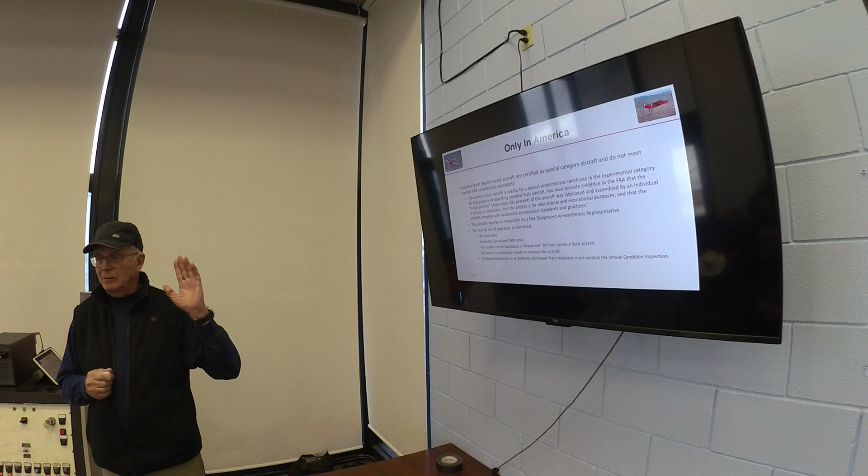I'm going to talk a little bit about amateur-built aircraft in general, and this is titled Only in America. What a fantastic country. This is one of the few places I know that you can design your own airplane, build it, test fly it yourself, see if it's going to kill you, and you don't have to have any instruction or a pilot's license to do that. That's the Part 103 ultralight class of aircraft. Isn't that incredible? The FAA will let you go out and kill yourself, and as long as it's just you, they don't care. It's a single-place airplane.

One step up from that is amateur-built aircraft, where you can do the same thing, but to fly it you do need a pilot's license, either a light sport aircraft license or a private pilot's license. But what's really cool is that once the FAA gives you an airworthiness certificate, which involves them coming out and inspecting the aircraft, and once you fly a test program for 40 hours in a particular area that you define with the FAA as a safe area to fly, then you can enter what they call Phase 2.

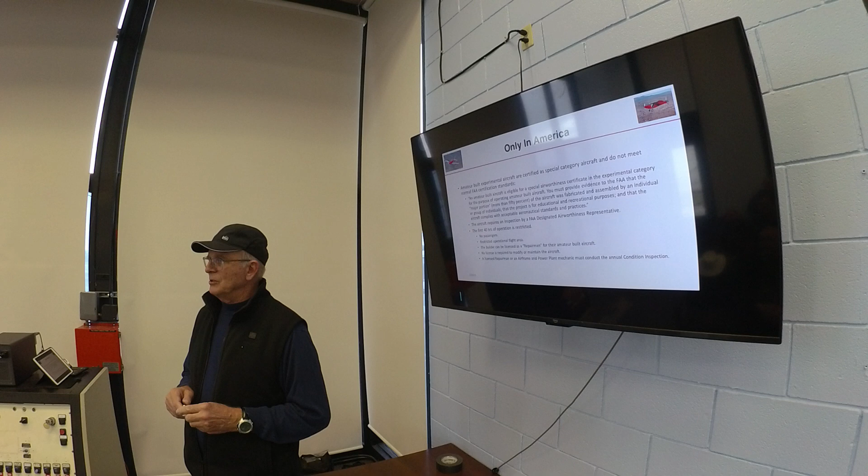And Phase 2 lets you take that airplane that you designed, built, constructed, and fly it anywhere that any GA aircraft can fly in the national airspace system. So you can fly it over cities, you could fly IFR, you could fly into big airports, small airports, just about any place, which is really great.

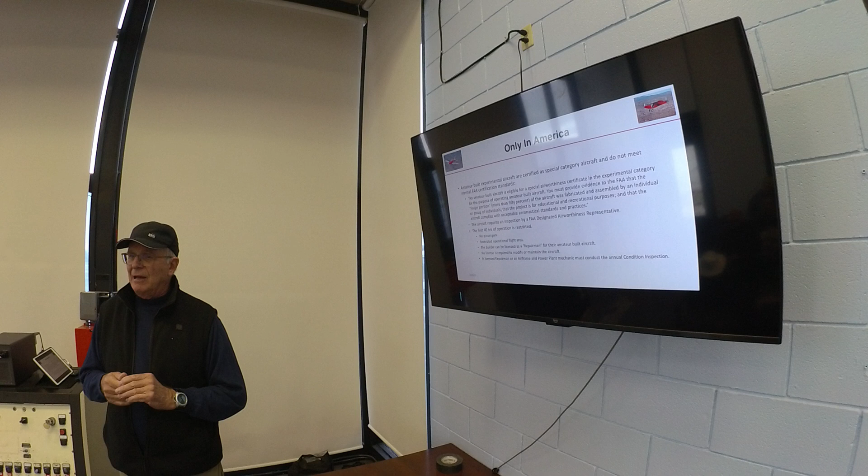And the other thing they'll do for you is they will issue a special repairman license for that aircraft that allows you to not only work on it, modify it, but also to do the required annual inspection of the aircraft. So you don't have to hire an airframe and powerplant mechanic to do that. So you can save a lot of money. And you can build the aircraft oftentimes for half or even a third of what it would cost you to buy a new airplane with similar performance. So, only in America. Really great.

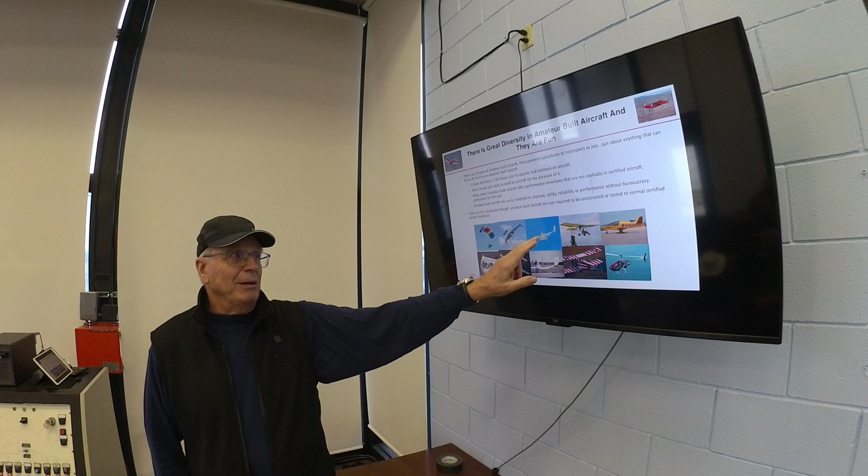Okay, there's a huge amount of diversity in experimental aircraft. Here's just some examples: powered parachute, ultralight, a rocket-powered aircraft, jet-powered helicopters, biplanes, turboprops, crazy wild designs. I mean, this country is prolific with different types of aircraft designs that fall into this category.

Okay, so what I'm going to do is compare the Venture and some other amateur-built high-performance aircraft to sort of the peak of piston aircraft design. And so aircraft design pretty much peaked towards the end of World War II with fighter aircraft. They had the newest aeronautical information for design, aerodynamics for design. They had big, powerful engines. They were single-place aircraft, so they flew fast.

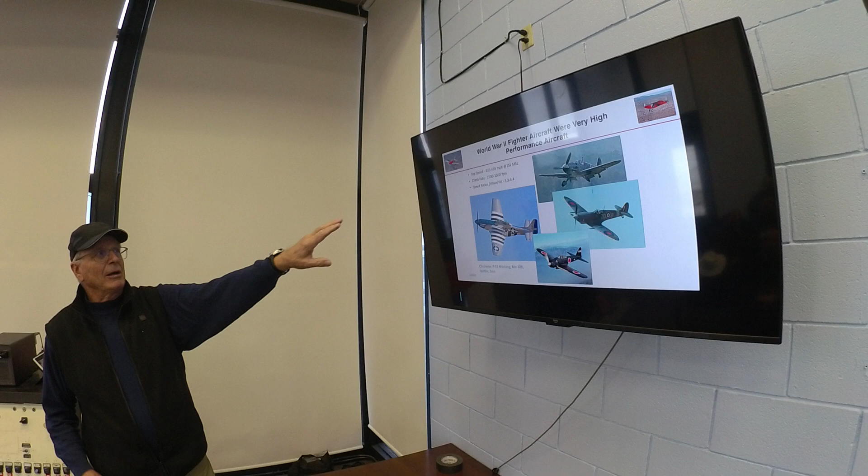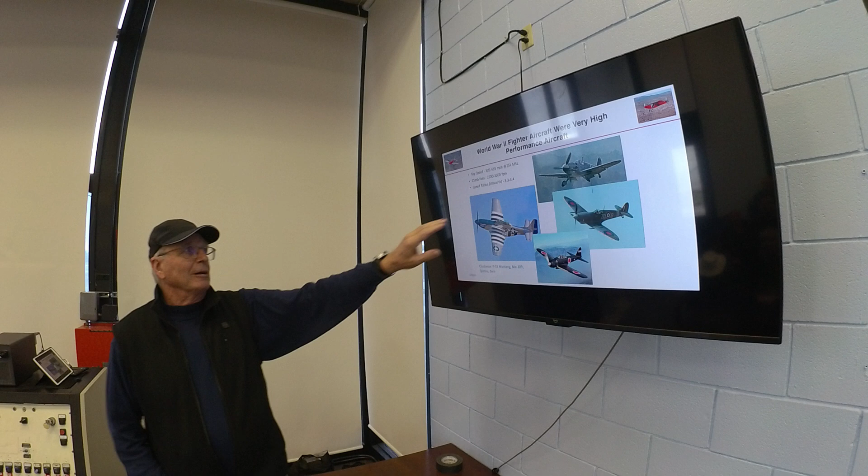And so here's a few examples of them. The P-51 Mustang, the ME-109, the Spitfire, and the Zero. Looking at these aircraft, they had a top speed range of 335 to 435 miles an hour at 25,000 feet. Climb rates of 2,700 to 3,300 feet per minute. And their speed ratio, remember we were talking about that, ranged from 3.3 to 4.4. So let's compare these to some of the modern amateur-built aircraft that have been built.

So this is a Venture. This is called a Thunder Mustang. It's a 3/4 scale of the P-51 Mustang. This is a turboprop called a Legend. Lancair IV-P, that's a pressurized four-place aircraft. Cruises about 220 knots at 25,000 feet. Here's another four-place. It's a pusher with a canard-type aircraft called a Velocity. It's also a four-place aircraft, and it'll cruise very nicely at about 200 knots at 10,000 feet.

This is a Viper. It's pure jet, and here's one of the RV series, the RV-8, which is one of their more efficient aircraft. These aircraft have top speeds from 200 to 450 miles an hour, climb rates from 1,500 feet per minute to 6,000 feet per minute, speed ratios of 3.2 to 4.2. So you can see their speed ratios are right in there with those World War II aircraft. And I got to tell you, that's what it feels like when you're flying them. They are thrilling to fly, these amateur builds.

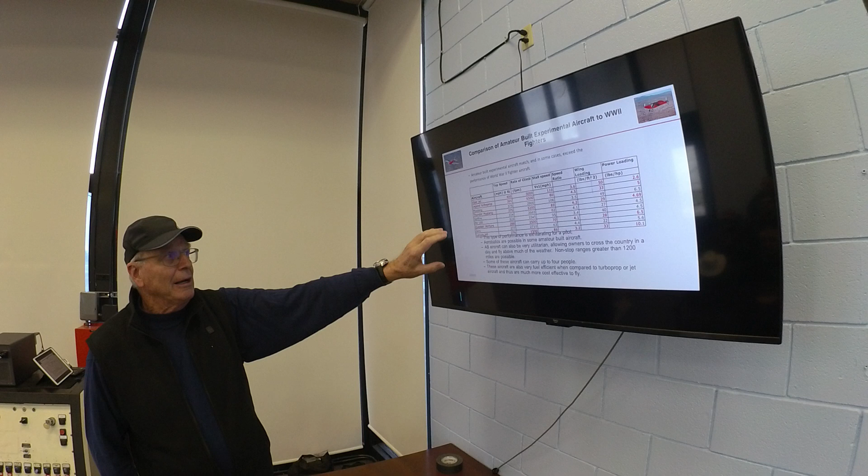So this just kind of interlaces those two. So this is top to bottom based on top speed. And the ones in red are the amateur-built aircraft. The ones in black are the military fighters. And so you can see they pretty much all line up right up there along with the fighters.

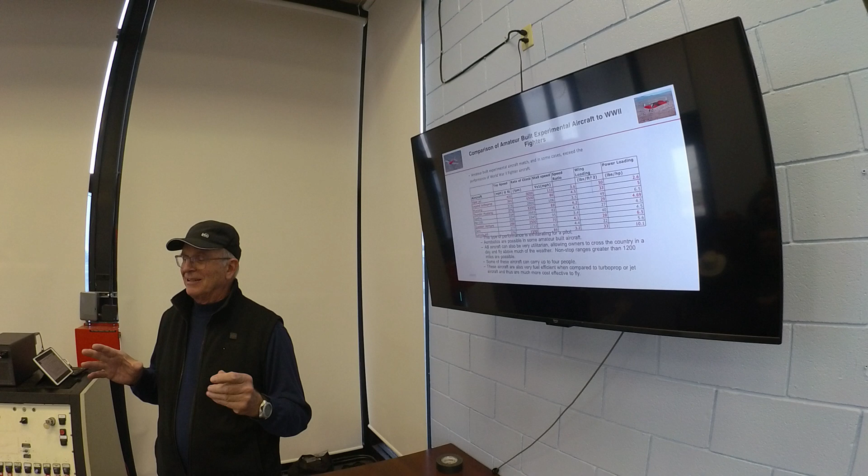Will, when you're talking top speed, is that top of green, top of yellow, VNE, when you do the speed ratio? So that's their VNE? Maximum cruise, no, not VNE, maximum sustained cruise speed. Okay, so top of the green arc, okay. It's as fast as they'll go, basically, at either rated altitude, 25,000 feet, or in the case of most of the amateur builds, it's between 8 and 10,000 feet.

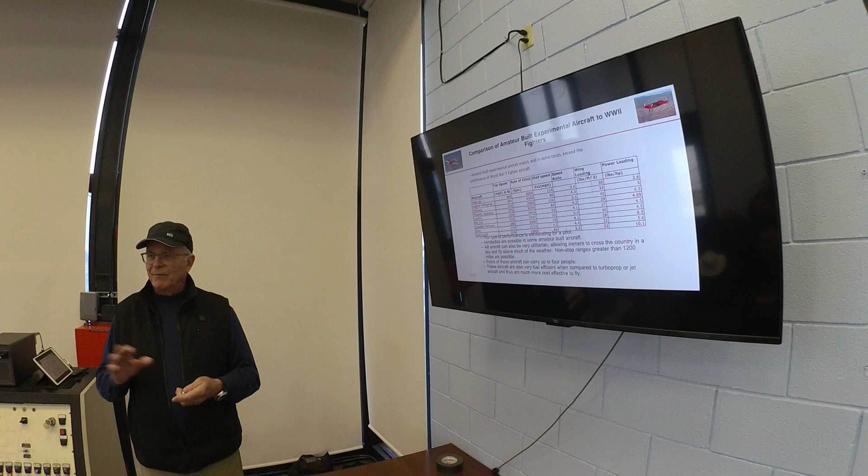So it's not VNEs. VNE on these was considerably higher than that. So on a dive, you could go much faster than that. And that's true of the experimentals too. For example, on the Venture, the maximum sea level speed is 250 knots, but my VNE is 300 knots. And that's indicated airspeed.

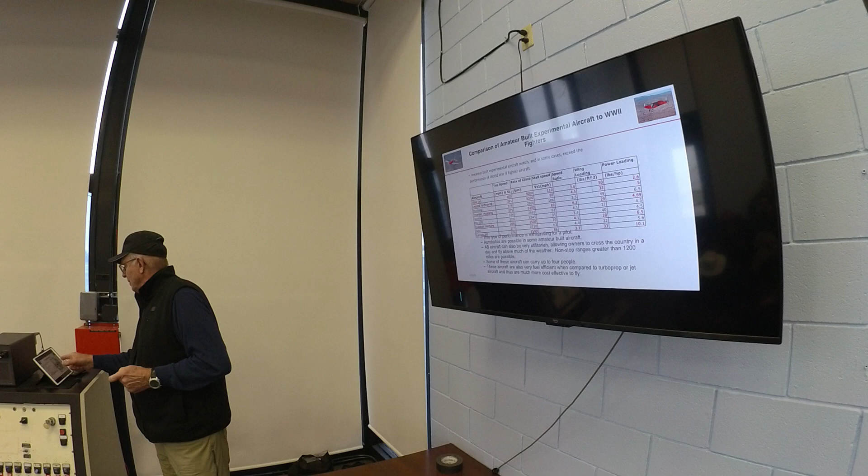So let me talk a little bit about the Venture design. So the concept for this aircraft was to build a high-speed, high-altitude, efficient cross-country aircraft. And the Venture really excels for high-performance aircraft in terms of efficiency, and I'll talk more about that. And basically, they wanted to build an aircraft that could fly halfway across the country in 4 hours. And the way they did this was, first, low drag. How do we make this a low drag aircraft?

The wing has an aspect ratio, that is the span of the wing to the chord of the wing, of about 10.4 to 1. If you consider more general aviation aircraft, those are more like 6 to 8 kind of aspect ratios.

And that makes for high flyers. The higher the aspect ratio, the more efficiency the aircraft maintains as it goes up in altitude. The other one was to minimize the fuselage drag, and that's one of the reasons the Venture has such a short fuselage. It turns out if you look at aerodynamic shapes for fuselages, the optimum ratio of length to diameter for a fuselage is 4 to 1, kind of like that flat plate number.

And so the Venture, that's what it is. The fuselage is a little over 48 inches in diameter, and it's about 16.5 feet long. So it's right in there. So that's a design for minimum parasitic drag. The Venture has got compound curves in it, so that everything in that airplane is curved. It's made out of aluminum, but everything has got an aerodynamic curve to it.

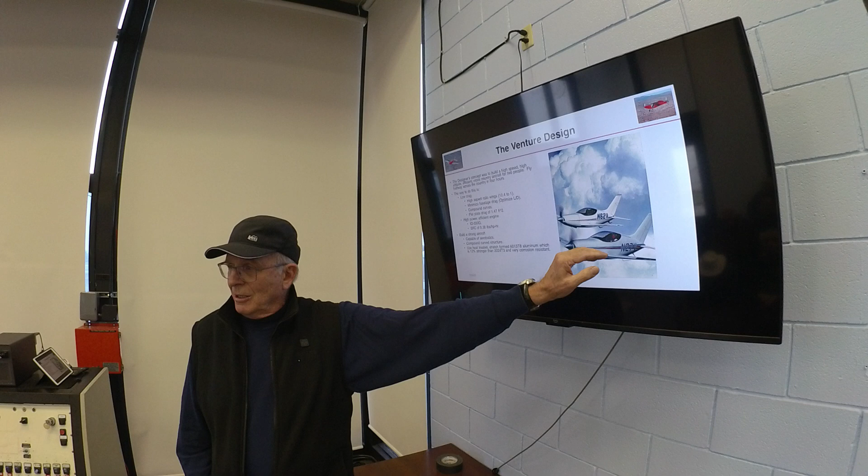And so if you look at the wing, not only does it curve from leading edge to trailing edge in an airfoil shape, it also curves span-wise from inboard to outboard. So everything's a compound curve. The fuselage is all compound curves, tail feathers, everything. And the way they did that was there was a new aluminum that came out called 6013. It could be annealed and stretch formed.

So the way they would form these compound curves is they would machine out a very accurate mold for wings, for the fuselage, and then they'd grab this aluminum in the annealed condition with these huge hydraulic grabbers, and they would just push it down over the mold. Just like you'd take saran wrap, right? Put it over last night's dinner or something like that. And then you'd cut the shape out afterwards.

And then they would go back and heat treat it, and this aluminum would heat treat to a 12% higher yield strength than 2024 T3, which is the commonly accepted aluminum. And in addition to that, it was very corrosion resistant. And it turns out that this fuselage is a monocoque type design, so most of the stresses are carried in the skin.

When you curve it like this, it's sort of like an egg, right? You know how tough eggs are because they've got all those curves? And the same thing with this fuselage. And I'll show you that makes it very crash resistant. Not crash resistant, but survivable in a crash. Now really, it is crash resistant, I'll tell you about that. But also, you want survivability.

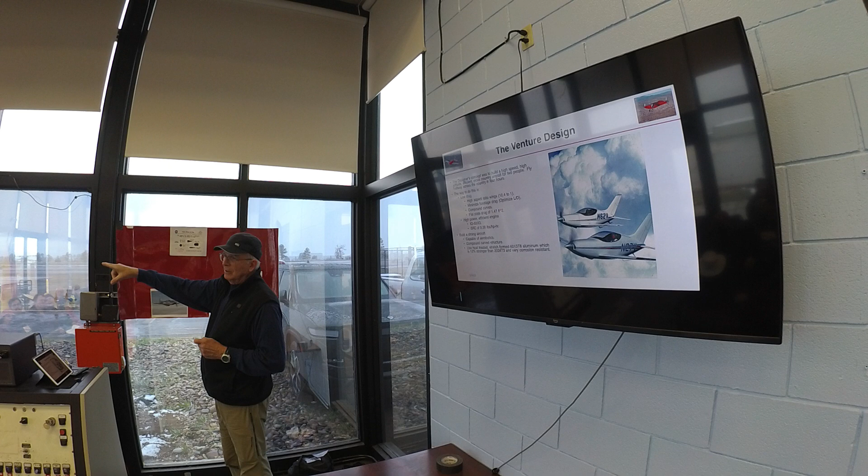So a P-51 at gross is 9,000 pounds, a 182 at gross is, where's Keith? What is it? 2950. So three times the gross weight. The reason they got this with the P-51 was they went to laminar flow airfoils and wings, and they paid a lot of attention to making it just as sleek as they could.

So I wish I was going to bring it out today, but the weather is crummy. But if you stand at the Venture and you look at the front, you've got this fuselage, that's like this rounded square that's like 4 feet by 4 feet, 16 square feet. And then you got the wings, you got the tail surfaces. The air thinks it looks like that. Pretty phenomenal. Coefficient of drag is less than 0.02 for the aircraft.

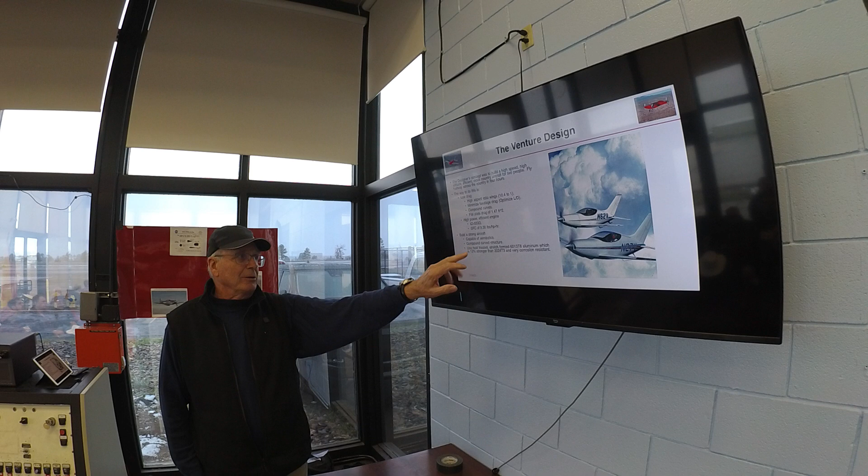They wanted the aircraft to be strong, capable of aerobatics, compound curve structure, and I talked about that. Okay, here's some stats on it. So the Venture, the air loves the Venture, and the Venture loves the air. It's a beautiful thing in the air to fly, and its performance is phenomenal. 250 knots, which is about 280 miles an hour, on 280 horse.

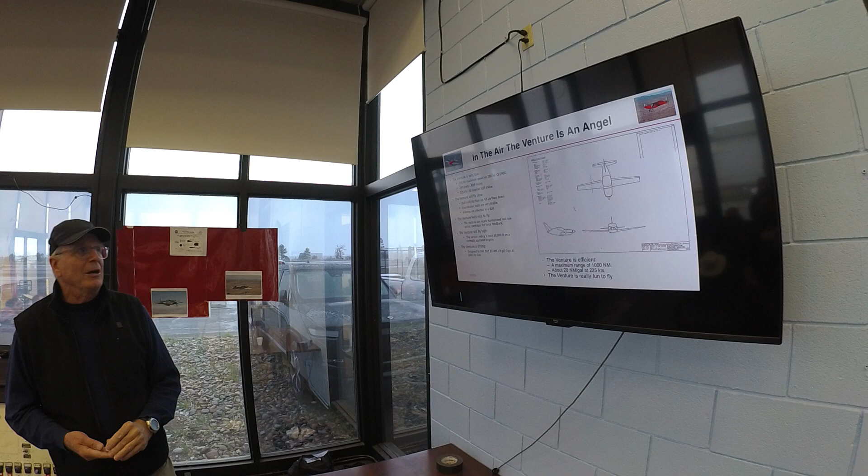240 knots, that's maximum speed. This is the rich of peak. This is when you have a richer mixture in the aircraft, so this would be around 0.38 to 0.4 pounds per horsepower hour. About 16 gallons an hour. This is where I normally cruise, 225 knots, about 250 miles an hour, 50 degrees lean of peak, and so I'm actually running a little bit less than 0.38 pounds per, so burning about 11.5 gallons an hour.

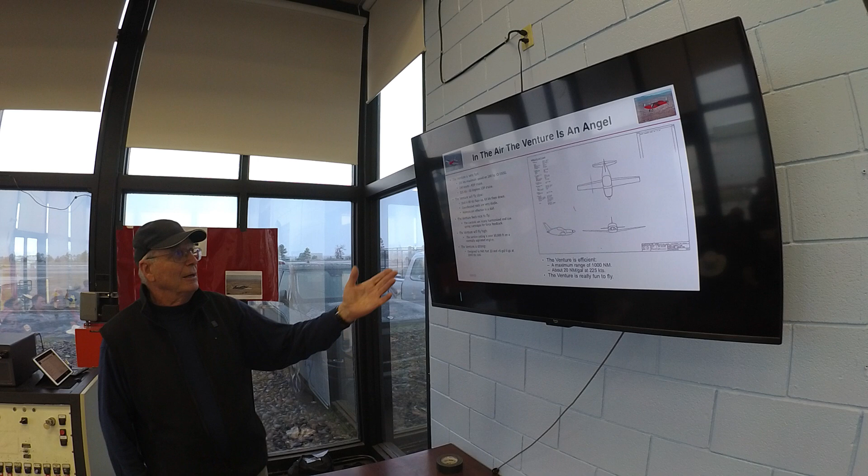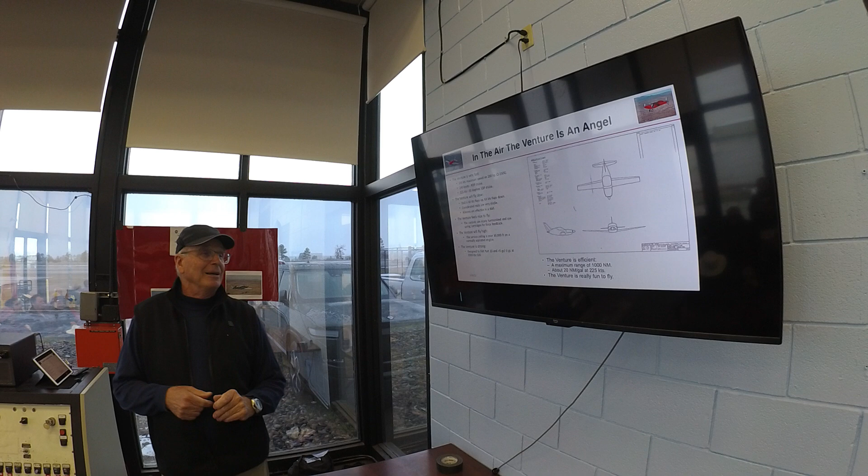It also flies slow, it has a big speed ratio. Stall speed 68 knots flaps up, 63 knots flaps down. Mine is 63 knots flaps down. The published is 61. It has phenomenal stall characteristics for a high-performance aircraft. Essentially not much of a break at all, and it's fully controlled. The flaperons allow it to be fully controlled in a stall, so you can roll the airplane plus or minus 30 degrees in the stall. Good feedback on the controls. They're all harmonized, so they feel right to you, and I'll explain that later a little more.

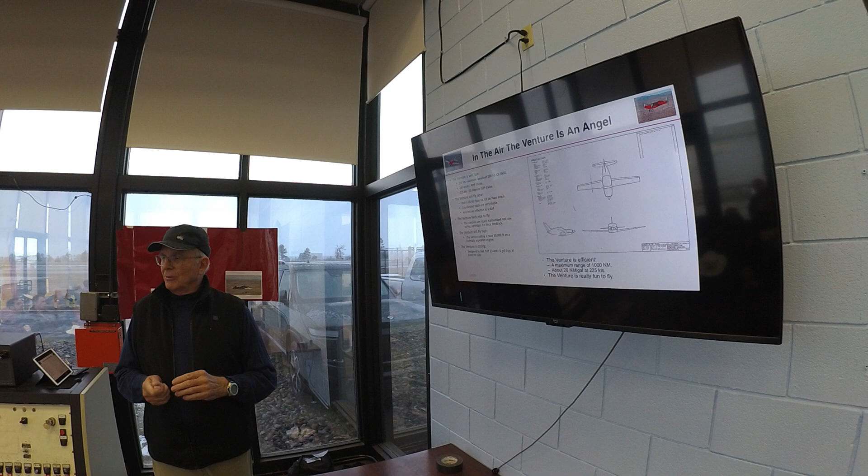Service ceiling on a normally aspirated Venture is 30,000 feet. So it set one of the early time to climb records and also an altitude record, and it was a little over 33,000 feet. And it's designed for Part 23. For those of you who don't know, that's standard certification requirements for general aviation aircraft. Plus 5 Gs, minus 3 Gs with a 2,000-pound gross.

Now, if you don't believe me, I could show you a bunch of these. But this is one from Steve Cook. He flies a lot of Haitian relief effort flights, and he lives up in Kentucky, and he goes down to Florida to pick up an airplane to fly on those flights. So he's flying his Venture down there. He's flying at 18,000 feet, so he's on oxygen. Venture isn't pressurized. His indicated airspeed is 175 knots.

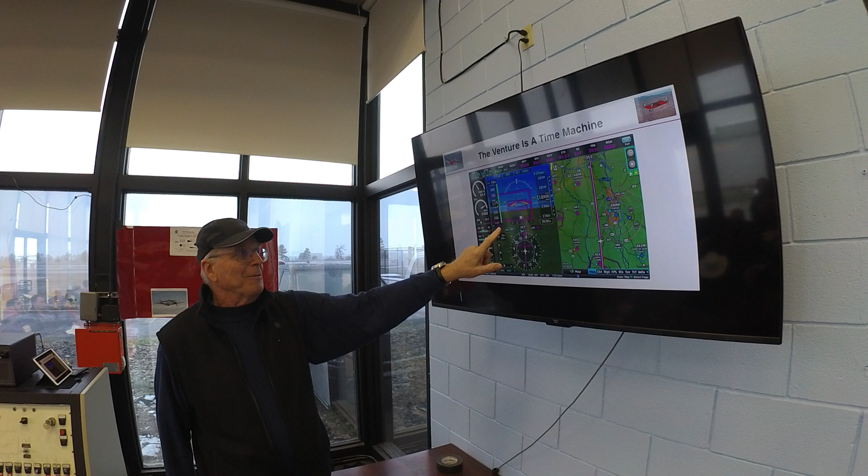His true airspeed, that's how fast he's really going through the air, is 236 knots, which is pretty close to that 240, but he's at 18,000 feet instead of 10,000. He's burning 10.4 gallons an hour. And according to the Garmin, his ground speed is only 237 knots. So basically there's only 1 knot of wind pushing him along up there. So these guys love to send these kind of pictures out to everybody and say, hey man, look at me.

Yes, sir. So you said it was pretty smooth and no break on stall? Yes. And what are the flying characteristics like if you're in slow flight? So they're actually pretty good. So the nose is up a little more, right? Normally in cruise it's way down, it seems like. It's up a little bit more.

But like over the numbers, I'm doing about 90 knots. And, you know, it's still got lots of roll. It's got full span flaperons. So the flaps are full span and they're coupled with the aileron. So it has really good roll authority. Does that make it difficult to find the stall?

Well, not particularly, because mine doesn't have a stall horn, but it has an aerodynamic rumble, and it was designed into it, so that as you slow down, as you start to approach the stall, flow starts separating from the wing. Not all of it, just begins to, and that's designed to hit the tail surfaces and cause the airplane to do this. So as you'll be flying along like this, it'll start slowing down, and then it'll start doing this.

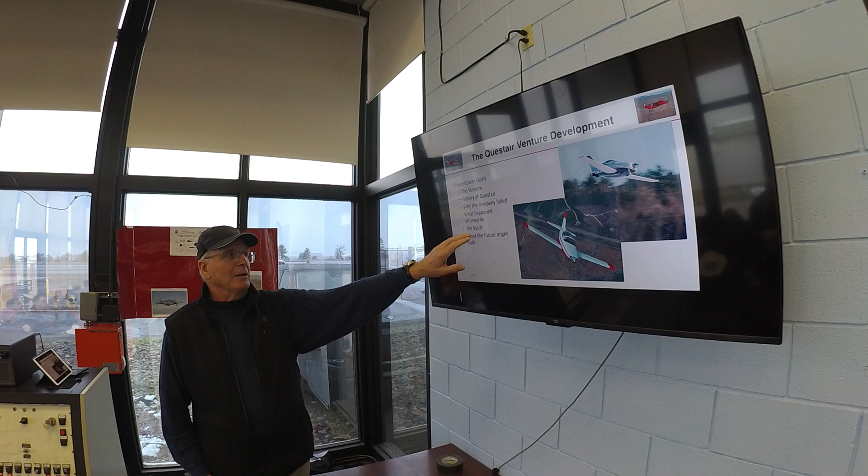Okay, I want to tell you a little bit about the history of the company, why the company failed, what happens afterwards, a fixed gear version of the Venture called the Spirit with a smaller engine, and what the future might hold. In the beginning, Jim Griswold and Ed Macdonough were amazing engineers. I didn't have a chance to meet Jim, but I had a chance to meet Ed Macdonough. A short story about Ed.

When he first got out of school, he was an aeronautical engineer. He went to work for Vought, I believe it was, and he went for an interview. They were walking around Vought, and they said, "Oh, we got something cool going on in the backyard here. Let's go take a look." So they go out there, and here was this machine. It had no wings, a giant propeller on the top of it, and a little propeller off to the side. And this crazy Russian was trying to fly it, named Sikorsky. So he got to see Sikorsky test flying the first helicopter, and that was sort of the beginning of his career.

At the end of his career, he was personal friends with the chairman of Honda Aircraft and was consulting at 90 for them on the design of the Honda aircraft. Just a real Renaissance guy. Jim was a very capable engineer. So both these guys worked at Piper Aircraft. Jim was head of engineering, and Ed was the chief design engineer for Piper. And these two guys came out with the Malibu.

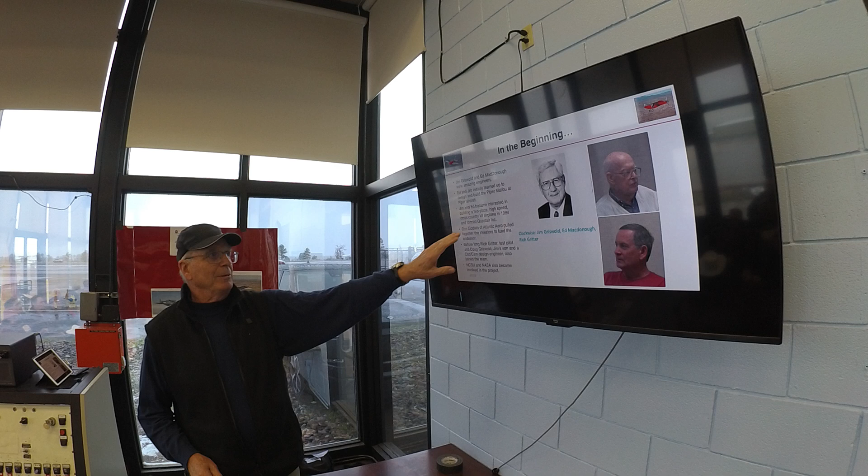While they were doing that, two other people joined them. This is Rich Gritter. Rich was the test pilot for the Questair Venture, and also he's an engineer and also contributed to design and construction. Rich actually was the chief test pilot for the Honda Jet as well.

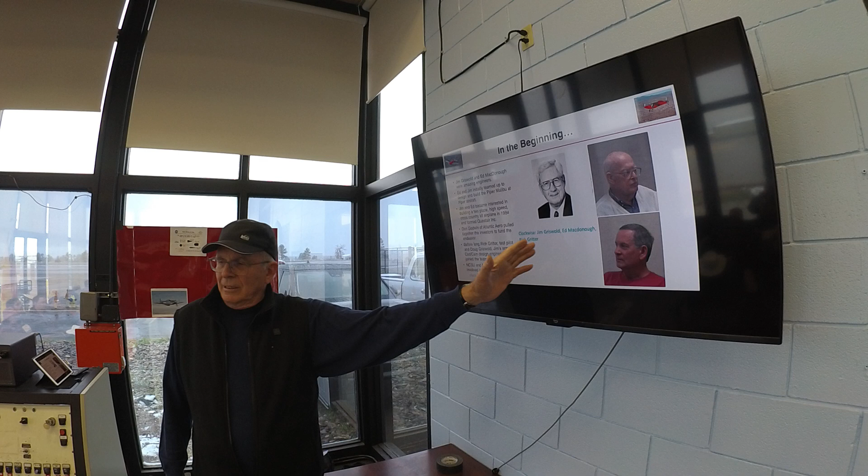And then Jim's son had just graduated from college. He was an aeronautical engineer. And he had a skill nobody else had, and that was, he knew how to do CAD/CAM. And nobody was building airplanes based on computer-aided design at that time. And so this was one of the first amateur-built aircraft kits that was designed completely on CAD/CAM and completely machined

using CAD/CAM. They hooked up with a guy by the name of Don Goldwyn, who owned a company called Atlantic Aero, and he pulled some investors together, and off they went. And in the process, they also hooked up with North Carolina State University and NASA to work on the project.

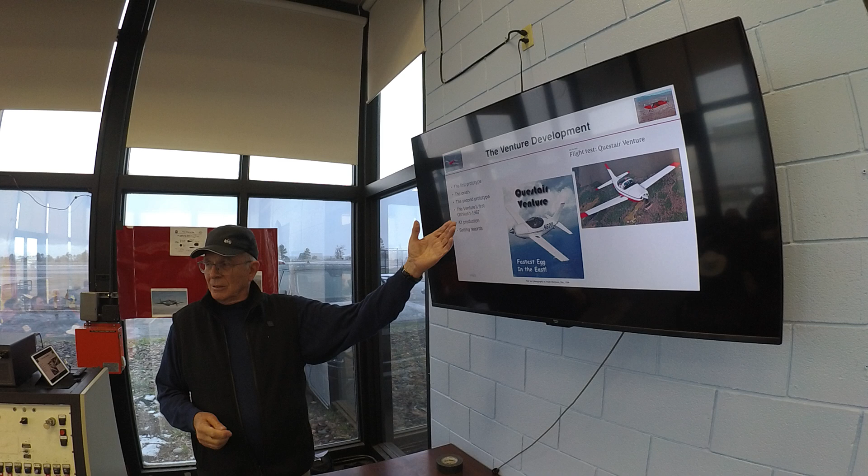So then they went into kit production, and they had about, I'll look at my next slide here. Oh, okay. Let me talk about setting records. So everybody wanted to grab one of these new airplanes and get it flying. There's some real enthusiasts associated with them.

And right off the bat, with the second prototype, they set the world time-to-climb records to 3,000 meters, 6,000 meters, 9,000 meters. They set the closed course records for 3 kilometer, 100 kilometer, 1,000 kilometer. This was in their class. And then they started racing at Reno and other races. And the Venture was winning all these races.

At Reno, there were two guys that did most of this, Tony Crawford and Mike Dacey. Tony's airplane, he retired just recently, a couple of years ago. It's in the Oshkosh Museum. He has a bunch of records and places in Reno and other races, and they're all listed on the side of his airplane. It was Chicks Delight. It was all on the side of the aircraft.

And Mike Dacey pretty much focused on Reno, and he wanted to win the Super Sport class, which is the class just below the Unlimited class, piston aircraft class. And he placed several times, and finally in 2010 he won the race. And his average speed was 374 miles an hour. I talked to him afterwards, he told me, you know, in the straights, Will, I was hitting 420 miles an hour.

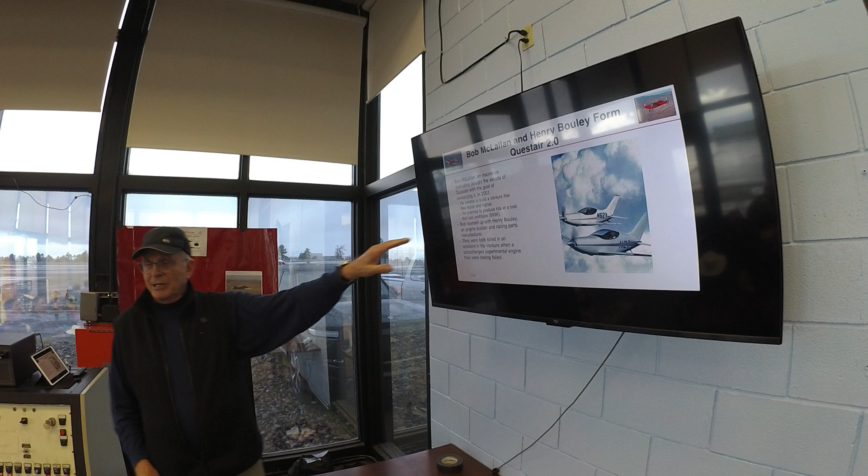But along came Bob McLellan and Henry Bouley, and Bob McLellan was a real estate executive. He was the money guy. And Henry was an engine builder and also built parts for certified aircraft. And they said, "Oh, we're going to be really successful. First of all, we're going to charge $90K for the kit, and we're going to make it fly higher and

go faster." And they said, what we're going to do is we're going to put a 350 horsepower twin turbocharged engine so this airplane can go to 25,000 feet and do 300 knots. Now 300 knots is kind of getting in the jet range, right? So this was going to be a real rocket ship. It was already a rocket ship, but this was going to be something else.

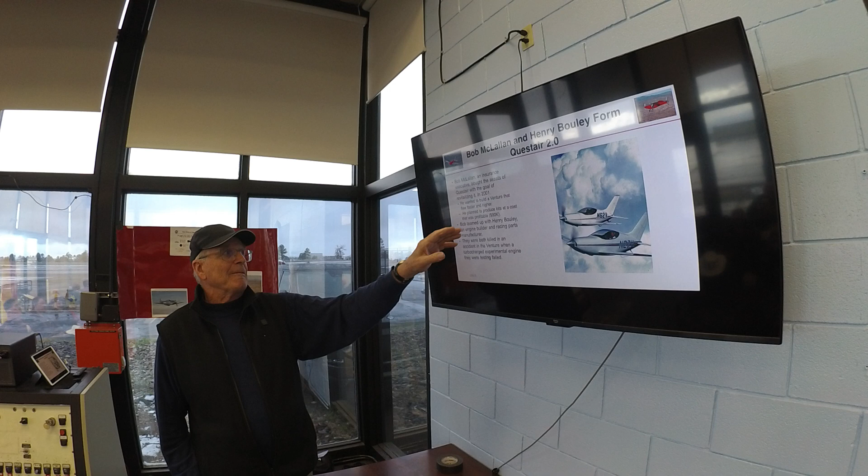And so Henry was an engine builder, and he decided that, okay, I want to build the best engine I can, except he couldn't get a forged crank. So he machined a crankshaft out of a billet of steel. Now this is going to tell you why you don't want to fly airplanes with cranks that aren't forged, okay? So he's flying this airplane, they're doing some tests, he and Bob are up there at 16,000 feet scooting along. I think they were probably doing 280 knots, 275 knots, and the crank let go because it wasn't forged.

They did a lot of metallurgical analysis afterwards to see what happened. And it broke in two places. So they had an engine failure. They were over an airport. You need to hear the radio calls, but they were over an airport. The engine was running rough, and then they thought it was coming back, and then it got even rougher, and then I'm coming down, and so they're spiraling down over this airport.

We lost the alternator. It shook the alternator off the brackets. We lost the alternator. The battery's going down. We're going to put the gear down. They put the gear down. Their descent rate went from about 800 feet a minute to about 2,000 feet per minute. The gear is a lot of drag, and it's designed to be that way to slow this thing down, because you got to slow these airplanes down.

And they came up short, and they stalled the airplane and spun it at about 1,000 feet AGL and killed them both. So that was the end of Venture 2.0. Went into bankruptcy again, but by this time there were 120 kits out there. People were building Ventures, and a few of the owners and kit builders decided they wanted to go in and buy the assets. One guy was Richard Clausen. He went and purchased a lot of the assets, which were remaining kits and the remaining parts production.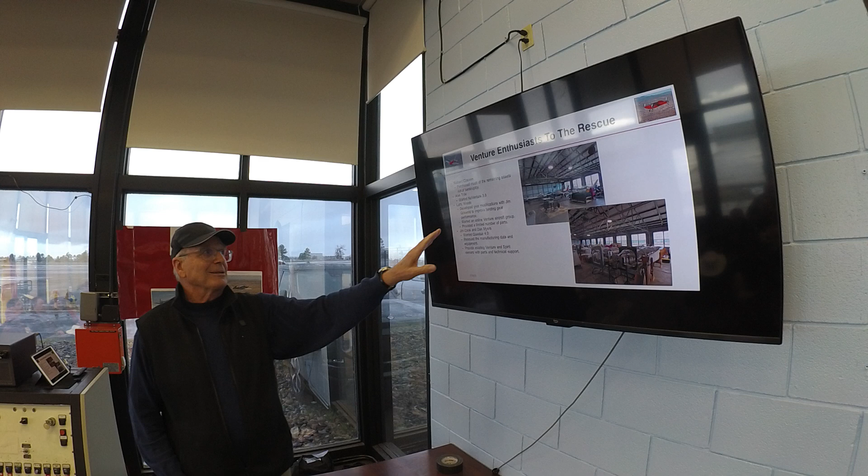He'd show up at Oshkosh with a folding table, and he hadn't even rented a place. He just found some place to set this folding table up, and he'd have a few brochures, you know, like handwritten and copied. And you go up to him and you say, "Hey, my name's Will Fox, can you tell me about the Venture?" And he says, "Well, I'm only going to talk to you if you're serious, and I just don't want to waste my damn time," and blah, blah, blah. He was the most grumpy, disagreeable guy you could imagine. And nobody could talk to this guy without getting pissed off. So he never sold any Ventures, but he had a lot of the remaining kits and parts.

And then came another Venturist, Larry Woods. He was a Canadian, really, really good guy. And he was a friend of Jim Griswold's. And there were some warts on the Venture I'm going to mention quickly. And Larry said, "I want to fix these warts, and we can build some kits to make this airplane even better. And Jim, will you help me?" So they got together and started working on it, and Larry started making these kits to fix things, and providing those, and also providing some spare parts. Well, things were going great, but Larry caught cancer and he died.

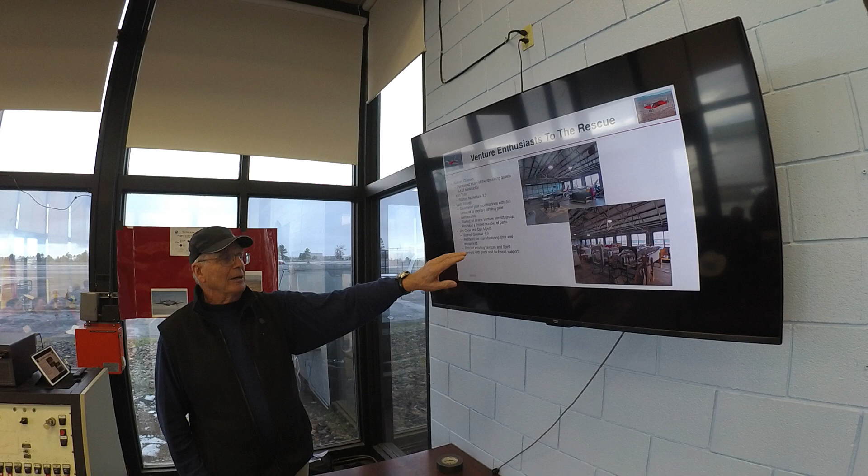And so along came Venture 4.0, Questair 4.0, with Jim Cook and Dan Myers. They were enthusiasts. Jim had built a Venture very early in the game. Had been very successful in an avionics shop he owned in Miami Beach. And they started Questair 4.0, and they rescued all these parts and kits and the manufacturing data for the aircraft, the drawings, the CAD files, everything, and brought it to Mississippi. And they're still functioning right now, and basically they provide Venture and Spirit owners with parts and technical support, but they're not building any kits.

They're really, both of them really good guys.

Okay, the Venture has a few warts. There were landing gear flaws, fuel tank leaks, trim cartridge wear, and stub spar cracks. The biggest problem with the Venture was low speed loss of control. Nobody got hurt in these accidents except one person, and he was killed in the accident. But out of 17 accidents, basically everybody walked away without any trouble.

And what would happen was there was this really quirky landing gear design, and one of the mistakes, and this was a mistake that the engineering team on Venture made, was they had the incorrect gas-oil ratio in the main gear struts. So in a shock absorber, you've got to have a certain amount of gas and a certain amount of oil. The oil gives you the dampening, the gas gives you the spring. Well, they had too much gas and not enough oil.

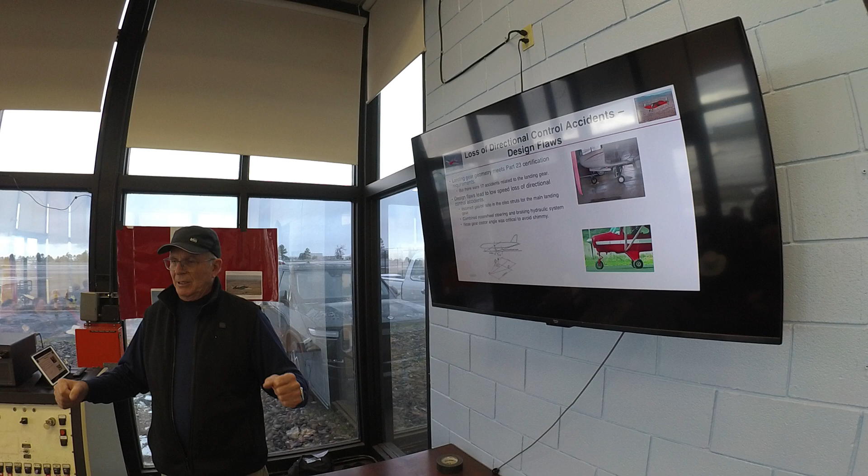So the main gear struts were just all over the place. They were really springy, with hardly any dampening. And that would get you in an accident. If you were landing in a crosswind and the wind shoved you to the side, that shock would compress, right? And you'd start to go that way. The pilot would make a correction, and about the same time, the strut would pop back up. And so then there'd be a bigger swerve. So it induced these pilot oscillations.

They were worst when you got below 30 knots because your rudder was less effective and you were using nose wheel steering. And they had a screwy nose wheel steering too. Normally when you steer a nose wheel on an aircraft, from the rudder pedal there's a mechanical linkage that goes up to a bell crank that steers the nose wheel, right? Well, that was too heavy, too expensive. So what they did is said, we'll take the hydraulics coming off the brake and feed them to a hydraulic actuator that does that.

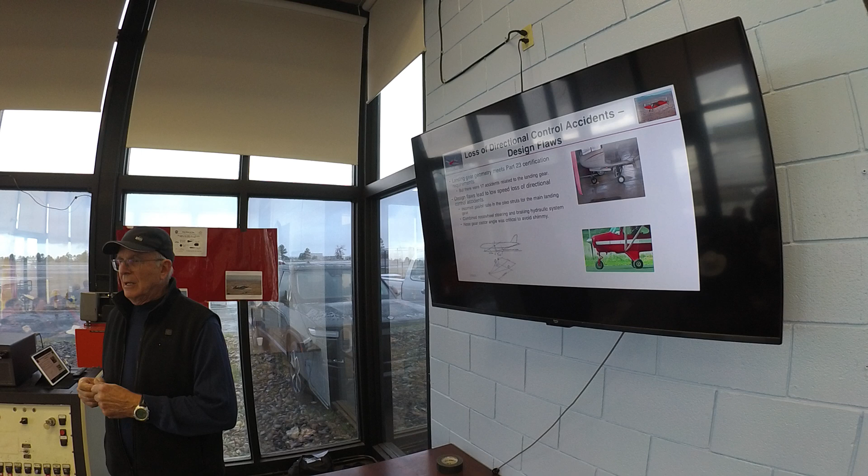So the idea now is, when you push on a brake, say the right brake, you're pressurizing the caliper of the right brake, but you're also shoving the actuator to turn the nose to the right. And so the more pressure you put on the brake, the more you turn the actuator. And God forbid that you actually hit both brakes at the same time, because then you couldn't change wherever the actuator was. You couldn't steer it, because you couldn't do differential pressure.

So then these guys would be in their second PIO going off the runway. Oh, heck, and they'd hit both brakes. They couldn't steer. They couldn't change its direction. And they'd go off the runway, hit a pothole or a ditch, break the nose gear off, sometimes flip over.

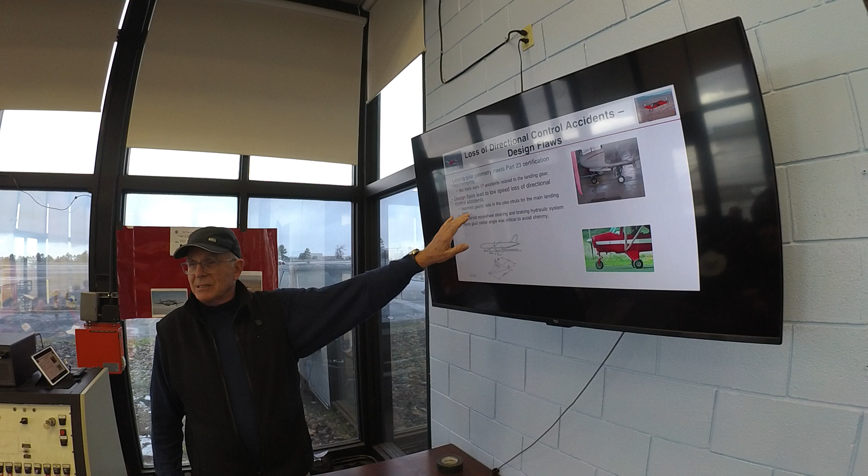That happened to Larry Woods. He said, yeah, I was upside down in the mud, and I was kind of sinking down in the mud, and I was watching it go by the canopy. I was wondering if everybody was going to get me out past the canopy, right? So five guys came over and lifted it up so he could get out. But that created a lot of accidents. They weren't fatal, almost no injuries with that one exception.

And here's the really bad thing, and this is something to know about amateur-built aircraft. If you're going to buy an amateur-built aircraft, and you have 30,000 hours as an airline pilot, make sure all the controls work the way that everybody's used to them working. Because I'm going to show you in a minute that most of the accidents occurred to the high-time pilots.

And it's the law of primacy. You react in an emergency to how you reacted for thousands of hours, not to a new screwy steering system where you've got to just sort of tap this and get it back straight and then hit the brakes. And they had a problem with the nose gear caster angle, and it was prone to shimmy and needed a lot of attention as well.

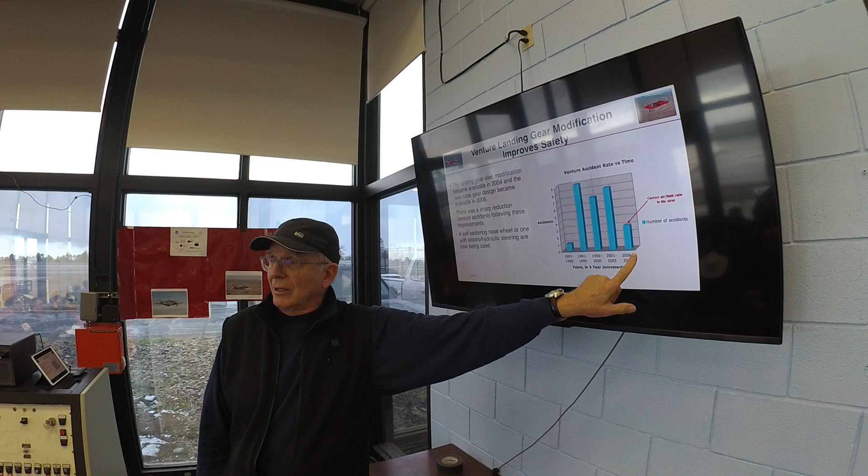To show you the difference, Jim and Larry got together, built a kit to change that gas-oil ratio. So this is the first year kits were being sold, so there was only one accident. Next year it jumped way up. These are loss of control at low speed accidents. Stayed there, stayed there. This was the year that the kit came out. And you can see suddenly a dramatic drop in those accidents. And it's been refined since, and basically we don't have those kind of accidents anymore.

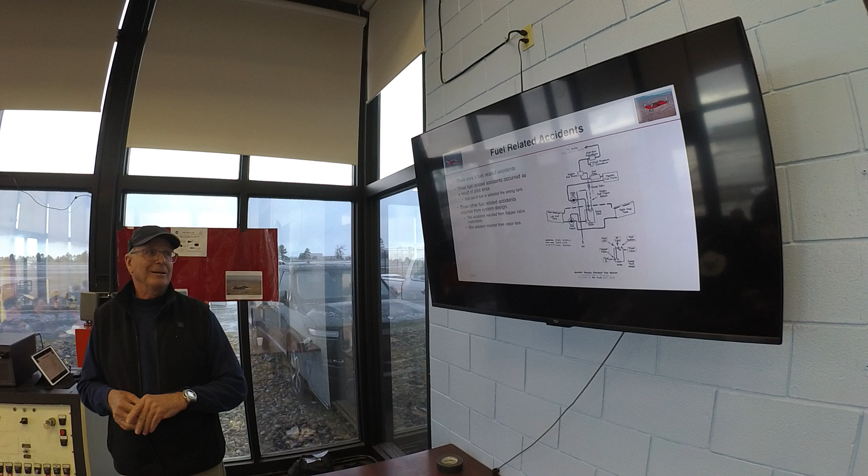There were some fuel-related accidents. There were 6 of them. 3 of them were due to pilots who don't know how to change the fuel selector on their airplane, don't recognize when they're running out of fuel, basically pilot error. And 2 of them had to do with a kooky fuel system. The Venture had a big sump tank, so that if you took off with the airplane without the fuel selector in the on position, you had about a gallon of fuel, and that would get you up to pattern altitude. And that was the idea, was you could totally screw up the fuel system, get to pattern altitude.

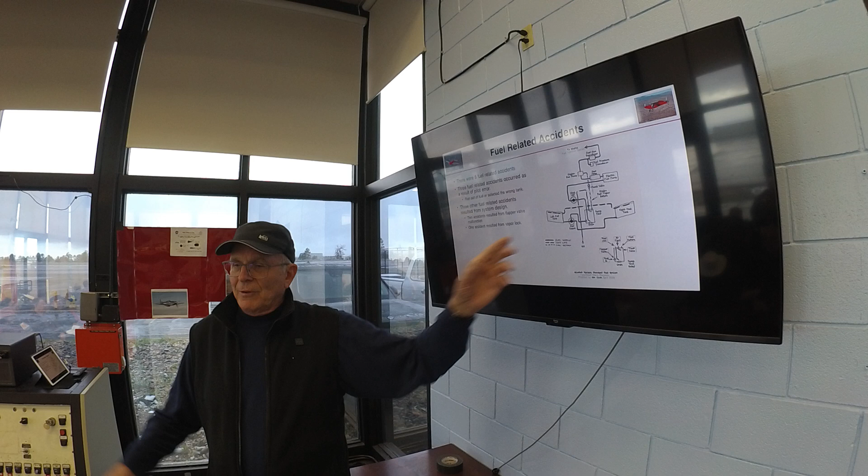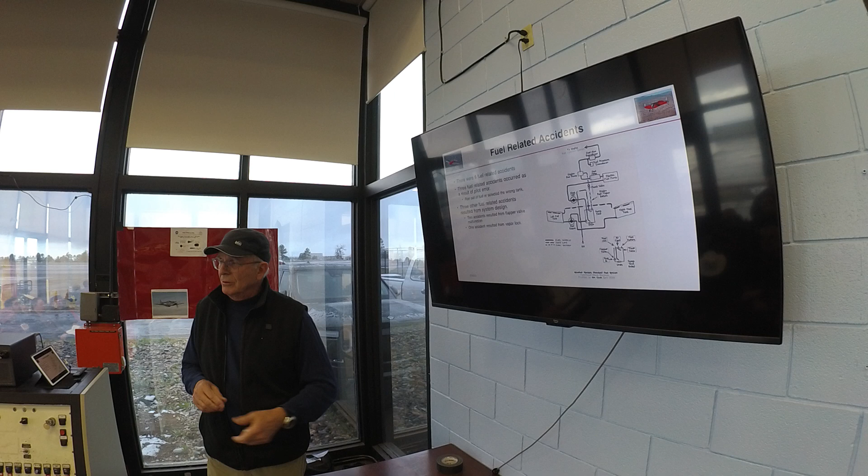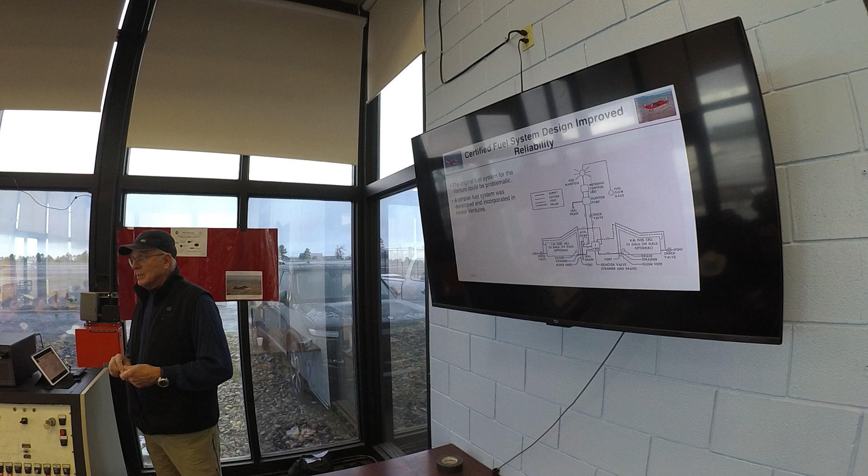But it was a big tank, and it had to have a flapper valve in it to prevent the fuel from sloshing around and sloshing back out. And this little valve was just a piece of aluminum on a piano hinge. And if you didn't install it just right, you either wouldn't get a good seal or it could stick, jam. And so some of them jammed, and they caused accidents. And then there was one accident due to a vapor lock, where the fuel and the lines in the engine got hot enough to generate some vapor. So that was easy to fix. Let's put a system in that's more conventional, like you have in a Mooney or a Bonanza or something like that. And so people started building them that way and didn't have a problem.

There was a trim cartridge accident. So this is looking inside. Almost all the controls for the Venture are right behind the dash. And one of the things they did with the Venture was the following. First of all, they put a side stick in. And think about this now. You've got a side stick, and the muscles you use to roll the airplane are your wrist muscles. Not exactly the strongest muscles on your body. When you want to pitch the airplane, you use the stick back and forth. You're using your shoulder muscles, a lot stronger than your wrist muscles. When you want to yaw the airplane, you're using these massive muscles in our legs. And so what you want is the muscles that you're using to be similar to the control deflections that you're trying to get.

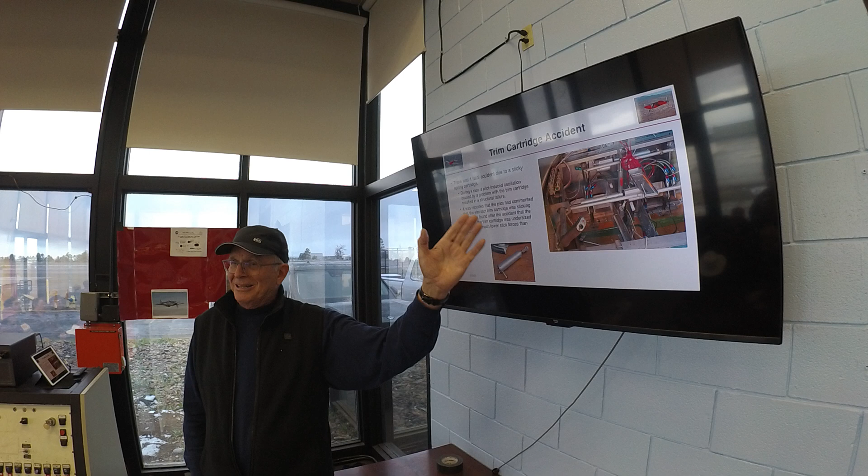One way to do that was to build something called a spring cartridge, where they put springs in, and they basically center, and if you move the bellcrank one way or the other, it preloads the spring one way or the other. And so you could put light springs into the roll control, heavier springs in for pitch, and even heavier springs for rudder. And you can make them all feel exactly right. So they used to try to do this with aerodynamic balancing, but that's hard to do, to get the surfaces to behave the right way. So this was a really good idea. Cirrus actually adopted this idea, and part of the reason was Jim Griswold was a consultant for Cirrus. And they also adopted the side yoke in the Venture.

Okay, so the accident was during a Reno air race. The pilot had put in very soft springs in the pitch direction, because remember you're pulling G's all the way down all the time on this thing, so he wanted it pretty soft. And on top of that, there was evidence he hadn't maintained this cartridge. You've got to make sure it stays lubricated. And there was some wear in it, and it jammed on him. And it jammed at the worst possible time. He flew through somebody's wake, it pitched the aircraft up. He responded. He over-responded. It's not uncommon, right?

He over-responded, the aircraft pitched down, the trim cartridge jammed. He didn't know it. And now he's going down, pulled back, wouldn't go, pulled back real hard. Boom! He overstressed the airplane and bent the tail feathers. So bad that they didn't fall off, but the airplane wasn't flying, and he crashed. It was doing about 330 miles an hour when it happened. So later on, Jim Cook came out with a new design that was basically frictionless. You didn't have to worry about the maintenance, and it works great.

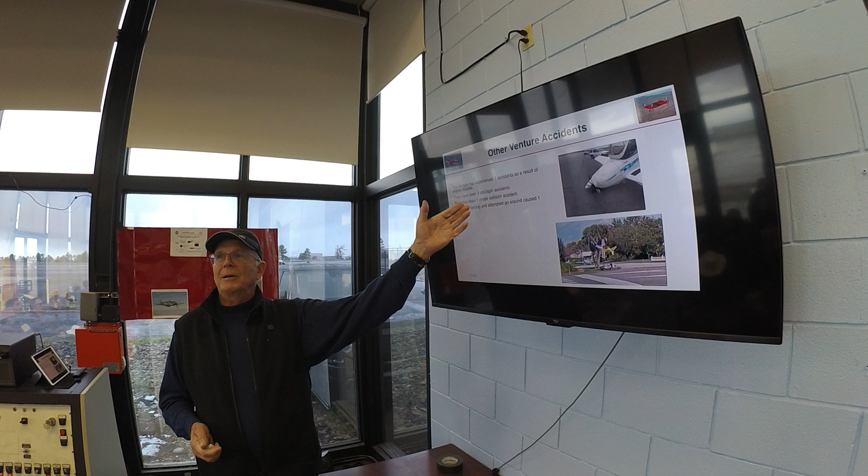There have been as many as 60 Ventures flying at a time, about half the kits. Right now there's about 30. So this is over a time frame from 2000 to about 2020. There was 1 mid-air collision. Both pilots were killed and their passengers. And there was 1 bounce landing attempt with the go-around, and that caused 1 accident. That's this accident. I'm going to show you a video of it in a minute here.

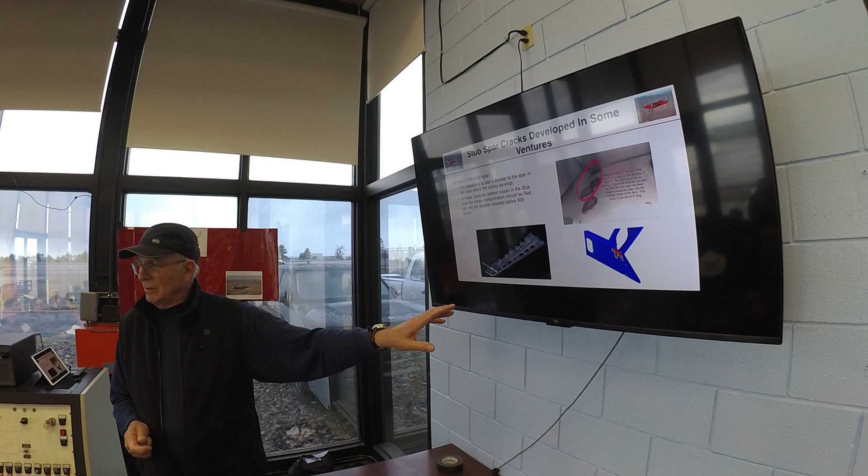The other thing that developed just about 5 years ago was we started seeing cracks developing in the stub spar in the wing. So cracks in spars, anybody that owns airplanes knows that those happen. This wasn't a huge issue, and I'll tell you why. The Venture has 3 spars in it. It's got a main spar that carries all the lift loads. It's got a rear spar that carries the flap loads and also some of the main loads. And then it's got a little short spar up here called the stub spar. And that helps carry some of the torsional loads in the wing.

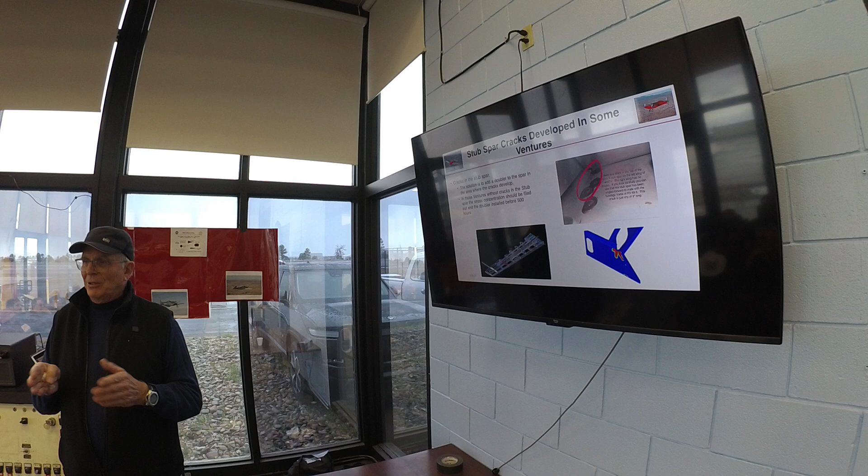And what people saw was cracks were forming in the spar, right where the spar went into the fuselage, both top and bottom. And the reason they were forming was 2 reasons. One was the Venture has these 3 spars, right? These 3 spar tabs that have to get inserted into the fuselage, and then you bolt everything in. Well, when you put a wing on, you got to align 3 things at once, up and down, side to side, by angle, on 3 different spars. And guess what? That's really hard to do when you're building a home-built airplane. So inevitably, they wouldn't be quite aligned.

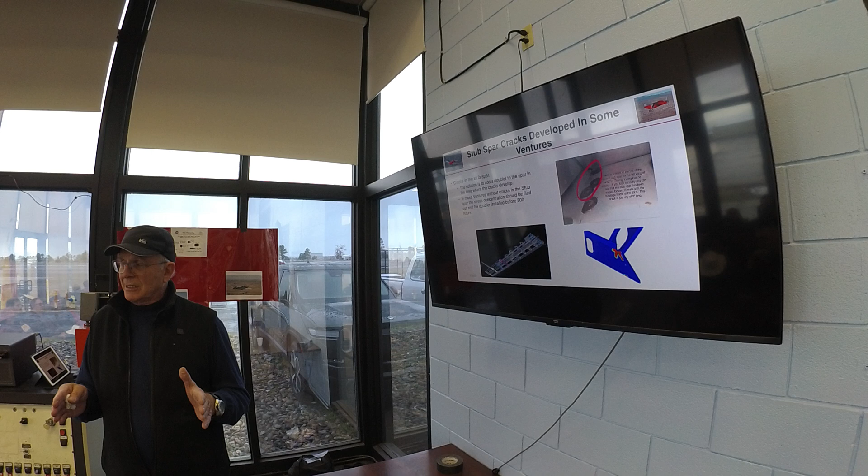And this little short stub spar tab was the softest in the system from an engineering standpoint. It was the most flexible, right? So it's the one that always gave when you push the wing in. And so not always, but if the alignment wasn't right, it would get a little twist in it. And so it would have a preloaded torsion in it. And then you stack on top of that the normal loads that it would see. And so it was seeing more loads than would be normal.

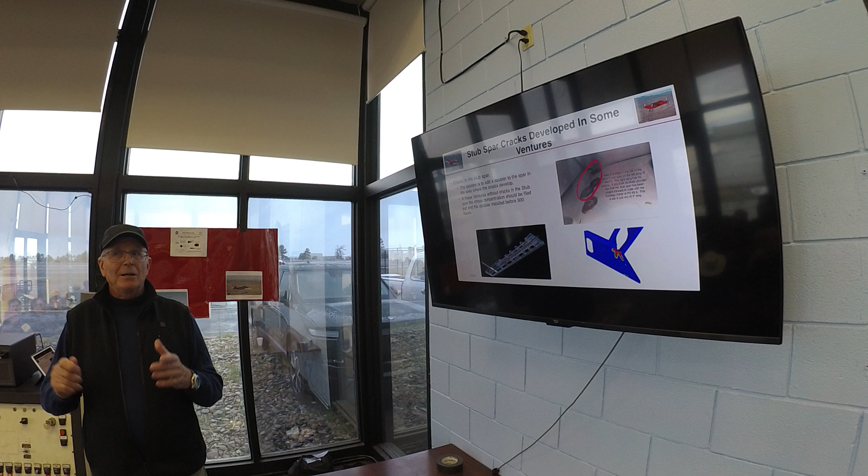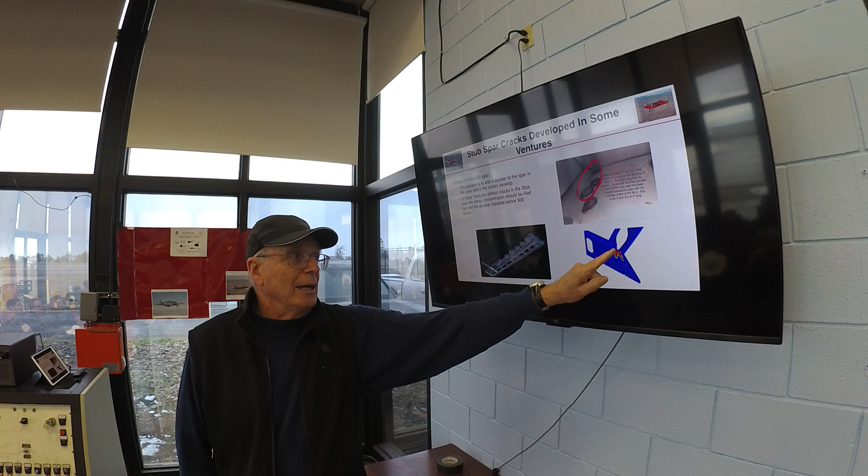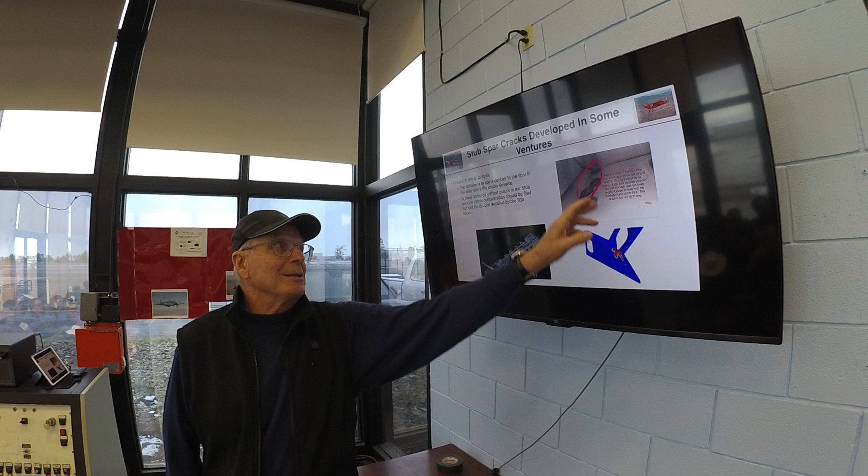And then it was made worse because of the plans. This little stub spar up here is a channel. This is a finite element analysis picture of it showing the stresses, and high stress areas are in red. It was a channel that came all the way out, but they just wanted a tab. So what they did is they came back in and cut the flanges of the channel off, top and bottom, so they would just have a tab. And they cut them off at a 90-degree angle, and that created a stress concentration. It should have been radiused. It probably should have had a doubler in it. But anyways, these cracks started developing. They didn't develop usually until after 500 hours.

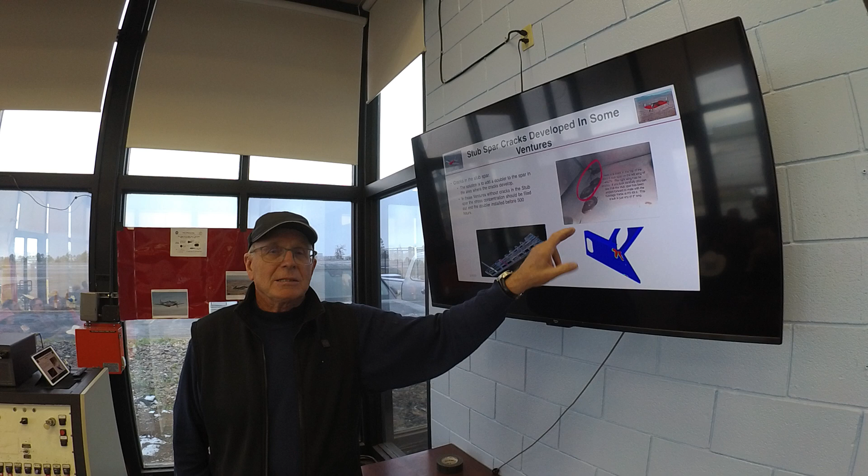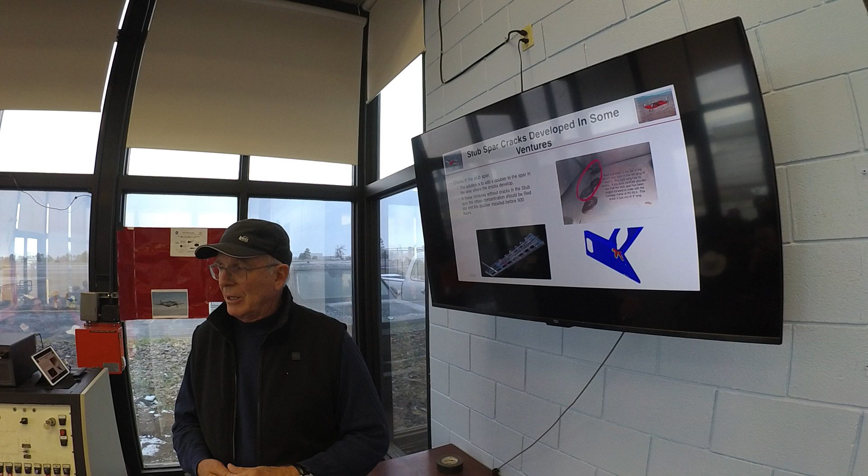So as a result of that, two things happened. They said, we need to put an inspection hole in so you can see these, because it's hard to get in there and see them with the wing in place. So we can inspect every annual. And we want you to do that after 250 hours for sure, and then inspect it every annual. If you find you've got cracks, pull the wing, drill stop the cracks, and put a doubler in. A doubler is another reinforcing piece of aluminum. And also radius any of these corners if they're not cracked. And so that was the solution to that.

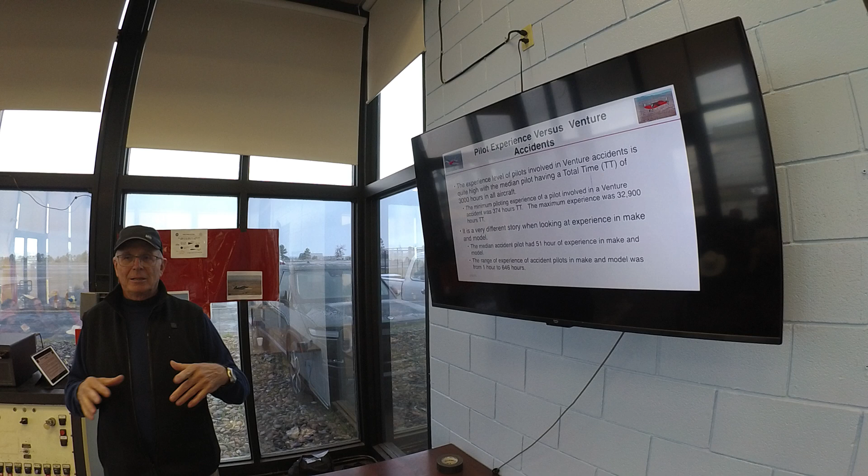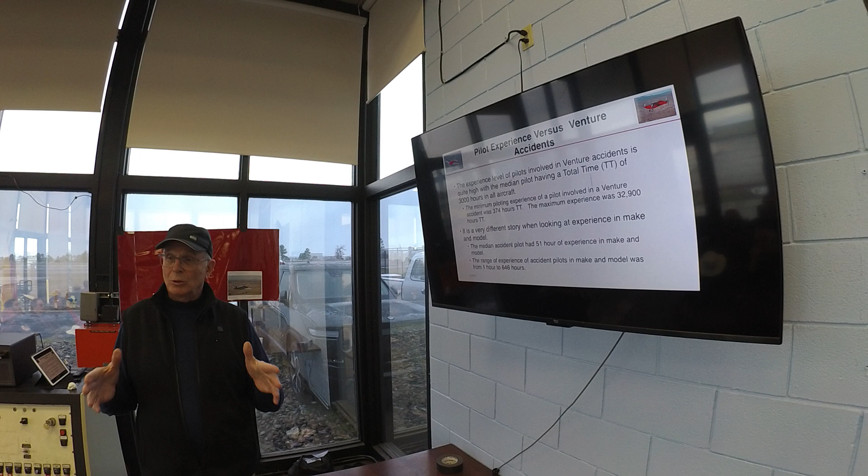Okay, this is a real lesson. You know why your insurance company wants you to have time in type nowadays? If you're going to buy an amateur-built, they want transition training and some time in type before they'll insure you. Well, I'm going to show you some really strong evidence why that's important. So I looked at all these 30-odd accidents, and I looked at the accident pilots, and I said, okay, what's the median of total hours? So this would be the total hours in their logbook over whatever aircraft they flew.

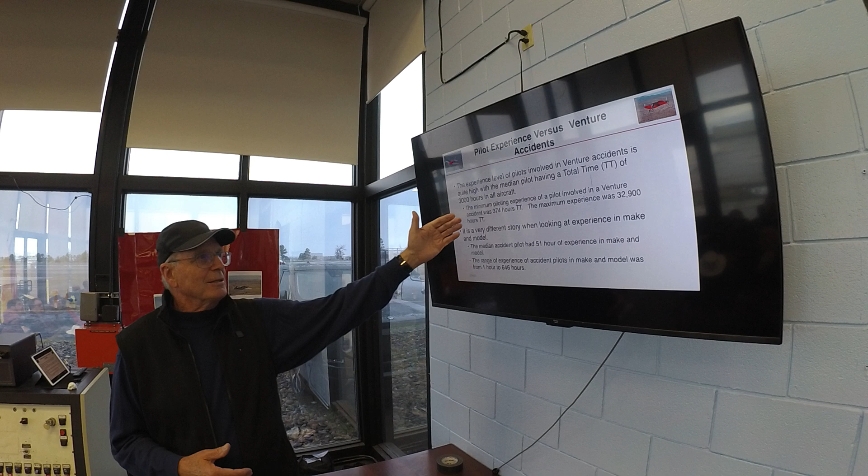The median was 3,000 hours. So these were experienced pilots on average. The highest pilot had almost 33,000 hours. The lowest pilot had 374 hours. Okay? And so your first conclusion is, it seems to affect pilots with low experience and super high experience. What's going on? Average of 3,000. These are pretty experienced pilots. If you look at their experience in type, that is in a Venture, the median accident pilot only had 51 hours, and the range was from 1 hour to 646 hours. And so if you put that on a chart, it looks like this.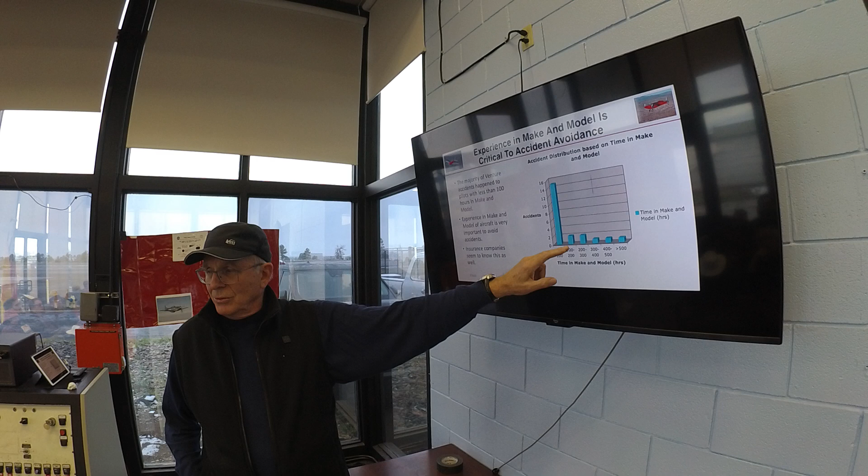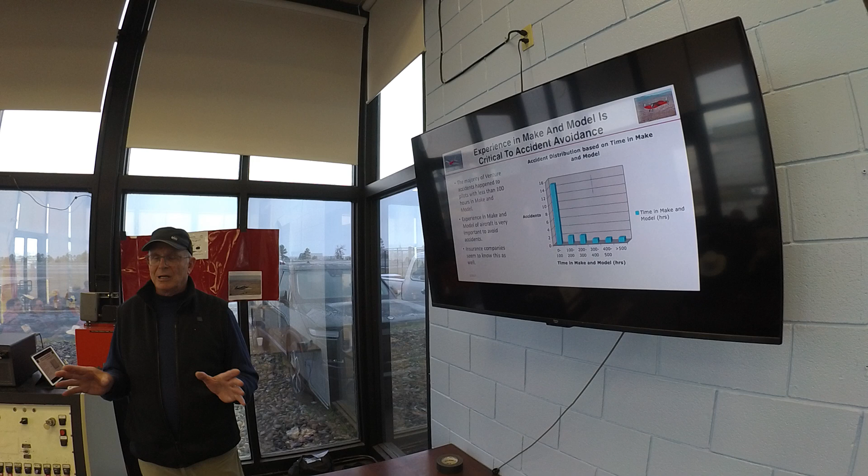Pilots that have 0 to 100 hours, almost all of those accidents were pilots with less than 100 hours. As soon as they get into the 200-hour range, it drops way down, and then it just continues to drop as they get more hours. So what this should tell anybody that's going to buy a homebuilt, or any aircraft, really, even GA aircraft, is that homebuilts are particularly important.

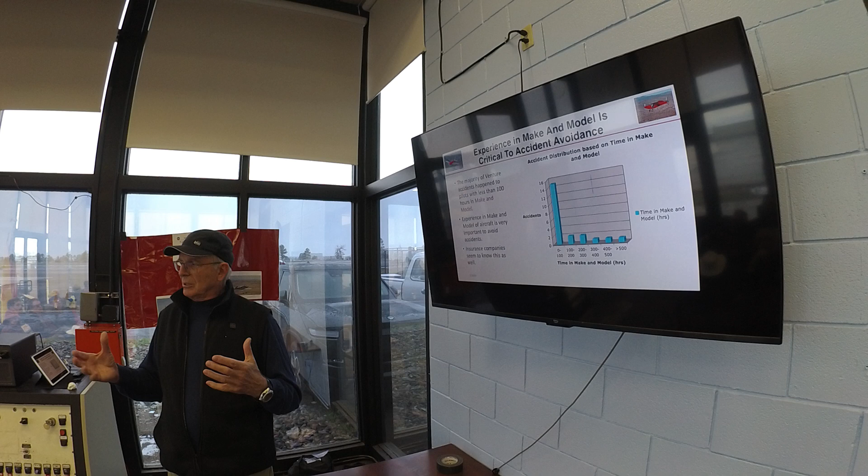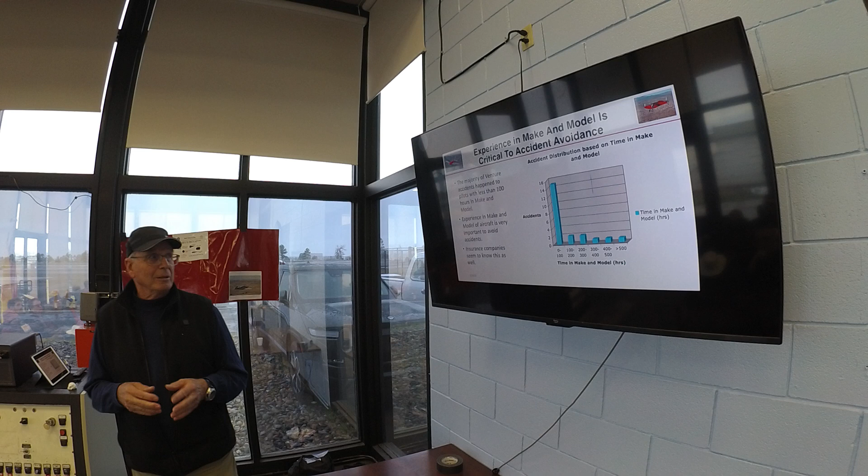There's such a range of performance in homebuilts, and the types of systems they have in them, like this quirky landing gear system that the Venture had. You need to learn all of those, and it takes time to learn all those things in the airplane. And you're at risk until you get trained to respond to that particular aircraft and its systems. And that's why time in type is so much more important than total time when you're moving from one airplane to another. Make sense to everybody?

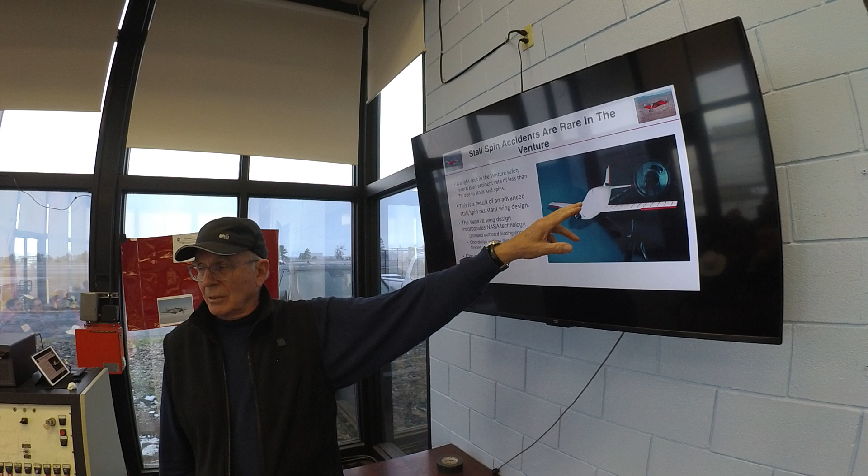Here's the good things though. Great stall spin resistance, monocoque cockpit design, side sticks, and communication between builders. I told you NASA was interested, so NASA said they were interested in preventing spins, and this is a full-scale Venture prototype in the full-scale wind tunnel at NASA. NASA wanted to experiment with this cool new airplane: how can we make it more spin resistant? And they said, okay, we'll do a couple of things.

First, we'll put drooped leading edges on the outboard portions of the wing, so that they're at a lower angle of attack. So they're not going to stall first, right? It's going to stall inboard and move out. And that's the way things normally work. So even though you can have a whole section of the wing stalled, the outboard is still flying. And that makes the stall softer, right? It makes it more progressive.

And then they said, we're going to put stall fences on it. But this is a really fast airplane, so we won't put stall fences on it. That'd be draggy. We're going to put

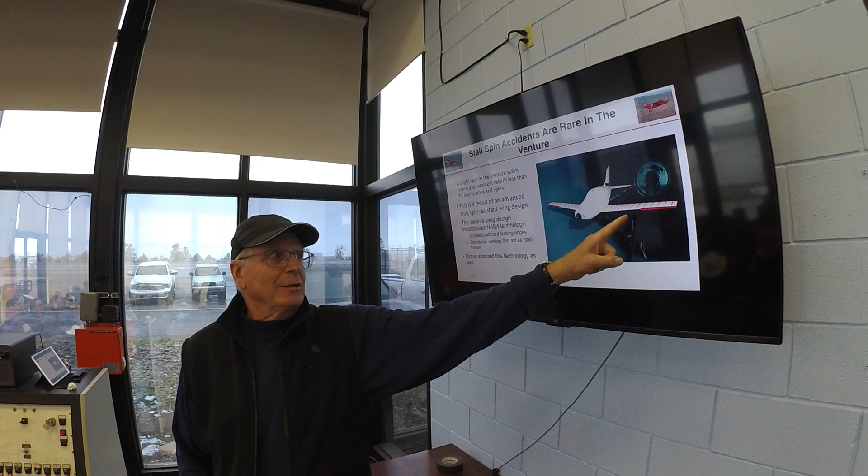We're going to put aerodynamic stall fences on it. So what they did was they put vortex generators right here and about right here. There's no vortex at cruise. When you get to high angles of attack, there's a slot in the wing at a certain angle, and it generates a really strong little vortex that goes chordwise over the wing. And that little vortex acts like a stall fence.

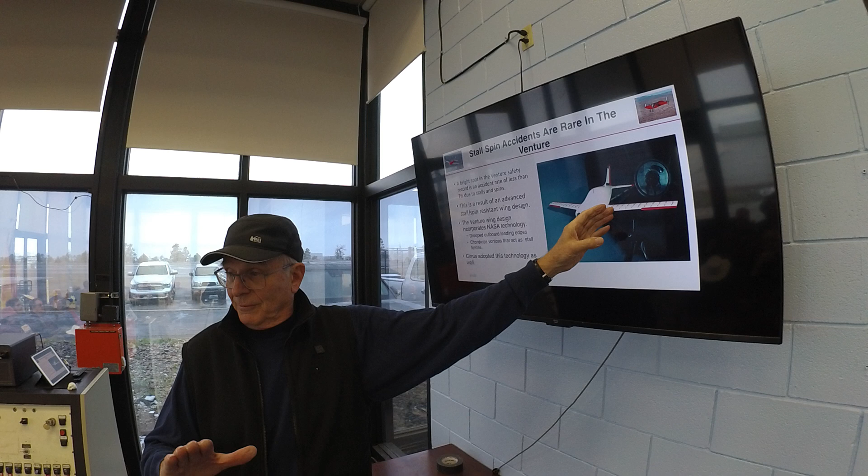So when the inboard section stalls, it's going to go out and then it's going to run into this vortex, and it can't jump over it until you increase the angle of attack a little bit more. Then it'll jump over it, but boom, it's going to hit another one out here until you get a little higher angle of attack. And then it'll jump over that one, but this has got a drooped leading edge, so it's not going to stall until you go to an even higher angle of attack. So this makes the wing lose lift very progressively with angle of attack. And that's what gives you those nice stall characteristics. Really cool.

I'll tell you something about people that race these kind of airplanes, or people that don't. So the racers said, oh, well, that's going to cost me a knot to have that vortex generator in there, so I'm just going to fill those slots up with putty, with body filler. And the racers also said, I don't need those drooped leading edges. I'm never going to stall this airplane, so we'll take those off. And it does. Getting rid of those things gave them a couple more knots.

And so what do all the wannabes do? Venture wannabes. Oh, the racers are doing this so they can go faster. I'm going to do this to my airplane for a knot or two. It's crazy, right? I mean, you're crazy. You're not a racer. You're nowhere near as good a pilot as a racer. Why do this? You've turned this into a much less benign aircraft in stalls.

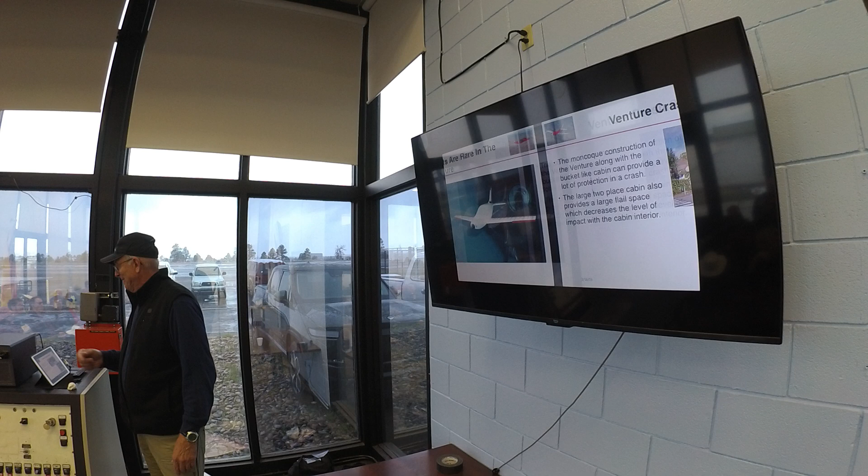By the way, Cirrus adopted this technology, right? If you look at Cirrus, they have droop leading edges. They have aerodynamic stall fences.

Venture crash survivability. So the Venture, it's like sitting in a Formula One racer when you get into a Venture. The sidewalls go up quite high. You're sitting down below the rear of the fuselage. You're really surrounded by an eggshell, is the way to think of it. And you're what's in the eggshell, right? You're the yolk. And so there's a lot of protection there.

And I'm going to show you this accident. Let me get it run. Okay, here it is. Is that moving? There it goes. I don't guess there's any sound with this.

Hard landing, rolls, snap rolls the other way. There's a guy in a golf cart right here. So watch it in slow motion. So they're coming in, they got hit by a gust. They were a little slow. It started to stall. You see they recovered, started to roll. They put all the power in, and it torque rolled. I'll tell you a little bit about that when this is over.

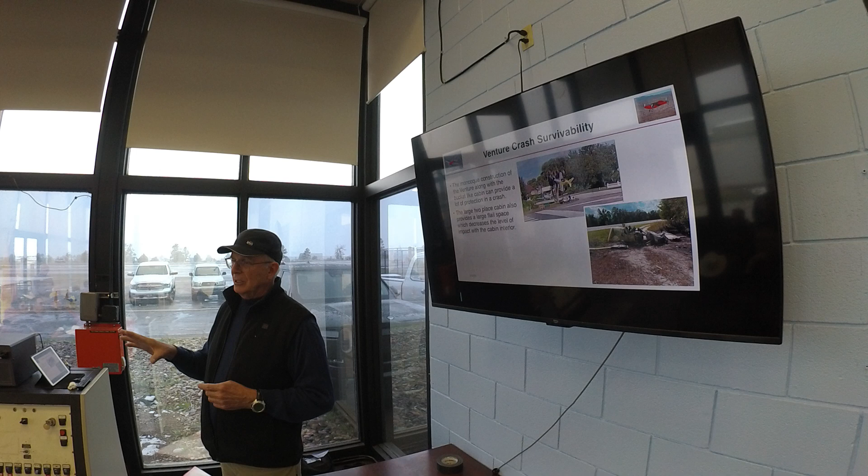What you need to do is feed the power in gently, and once you get to 30 knots, you can actually just hold it with the rudder. And once you're at about 50 knots, it's not much load at all. So the reason this airplane, when it first hit, you could see it suddenly sink. That was the start of a stall, and it wobbled.

The right wing tried to drop. They picked it up. It hit the ground. It bounced. It started to go to the left. And about that time, they were shoving all the power in to go around, and it torque rolled it. And that's why it ended up this way. So at low speed, you got to be careful with all the power.

Okay, here's probably the most important thing you can do in an amateur-built aircraft: join the club. Join the club for the amateur-built aircraft. Larry Woods, one of his largest contributions was he started a Yahoo mailing list back when the Venture first started coming out. And he got everybody to start talking to each other. And boy, problems get understood and solved in a hurry that way.

So nowadays any type club is going to have a way to join it, and it makes a huge difference. It made a huge difference in the Cirrus accident rates. They had a lot of accidents in Cirrus early on until they got together and said we need to train Cirrus pilots more specifically.

I'm going to run through these really quick. So I made some mods to my Venture to improve the ground handling, improve the fuel systems, better ergonomics, manual flaps, stronger engine mount, reduced cooling drag.

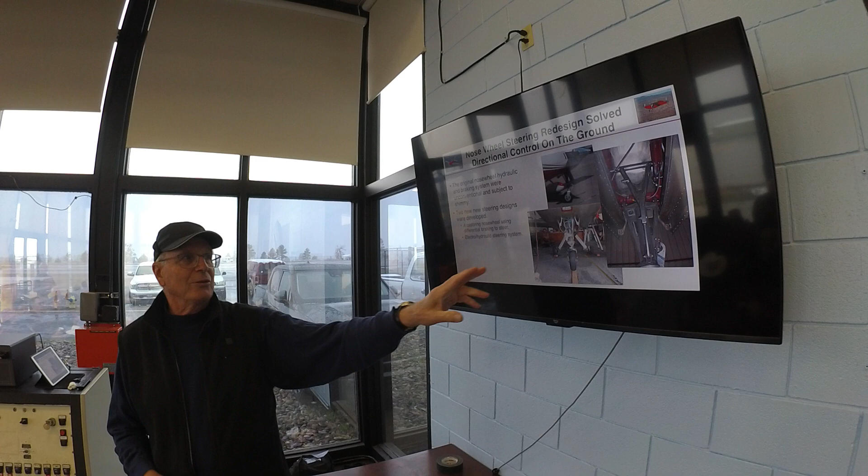So we talked about that nose steering problem. One of the problems I had in the Venture was this yoke up here on the nose gear was originally cast. It was cracking due to the loads on the nose gear. So I built a new one. I built it out of titanium, and it's never going to crack.

I also put electro-hydraulic steering on the Venture. So in the Venture, right next to the throttle, I can put my thumb on the switch, and if I move it, it's a momentary switch. If I move it to the right, it steers the nose wheel to the right. If I move it to the left, it steers the nose wheel to the left. And it's mainly for low-speed handling. Once you're going 30 knots, the rudder does a great job of steering it.

But it also serves as a shimmy damper. So it's attached to this bell crank. This is the actuator, but it's filled with liquid. It isn't a gas spring. It's just a liquid actuator, and so it acts as a shimmy damper as well as steering the aircraft. I still use differential brakes to steer too. You can do that too at higher speeds.

This is the electro-hydraulic motor and pump, and I put it in a clear plastic housing so I could see if it leaked easy. This is a good one.

So again, trying to save weight, they used a rudder bar for the rudder pedals. Normally rudder pedals go fore and aft in plane like this, right? And usually they pivot at the bottom, and then the foot pedal can angle, right? So they go this way. Well, this was on a rudder bar, so they had a vertical bar that came down, and a bar that came out, and the pedals attached to that. So when you pushed right, it rotated. And when you pushed left, it rotated.

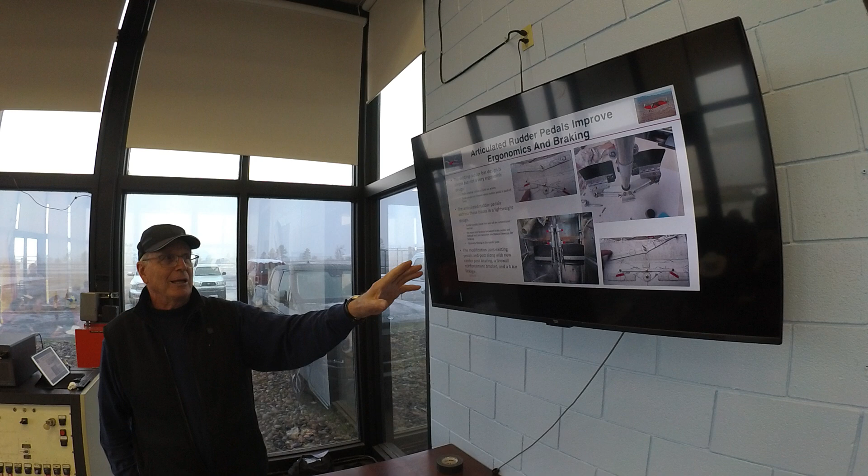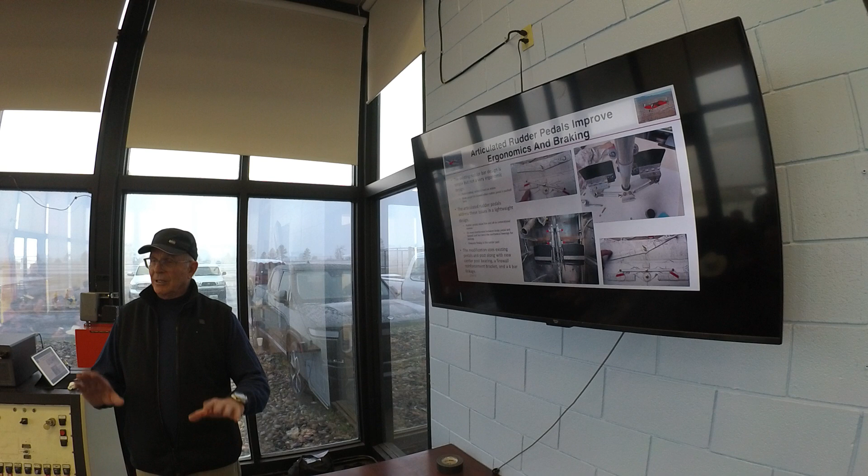So I came up with a 4-bar linkage and made these articulated rudder pedals. So they're still attached to the bar here, but there's a linkage in there so that as the bar rotates, the pedal stays in plane. It's really a pretty simple thing. Except that the other foot is moving out. Yeah, and it stays in plane too, so the pedal can stay in plane both ways. Which is different in a regular plane. Well, even on regular pedals, the other one comes out when you push it.

Being a big guy, do you have a tough time fitting yourself into this thing? I do. But it's worth it. I had to make some modifications for me to fit. The other thing was that originally it just had a seat belt and a shoulder harness. And for me, because I'm tall, the shoulder harness kept sliding off my arm. Plus the shoulder harness is a lousy way to use in an airplane, especially if it's aerobatic. I lowered the seats so I'd have more headroom. That was the biggest thing. And I'm in the process of putting in a higher panel to give me more room under my legs. Actually, I'm pretty comfortable in there now.

But I put in inertia reels, put in a 5-point harness, and I designed it for 26 Gs of forward impact, which is now the standard for designing aircraft. That's where you can take that kind of load in a crash and have no permanent damage if you're properly supported. Oh, and I went to Simpson Race Products. They make polyester harnesses. Polyester is stronger than nylon. It stretches less. It has a longer lifetime, less vulnerable to UV, and it costs less.

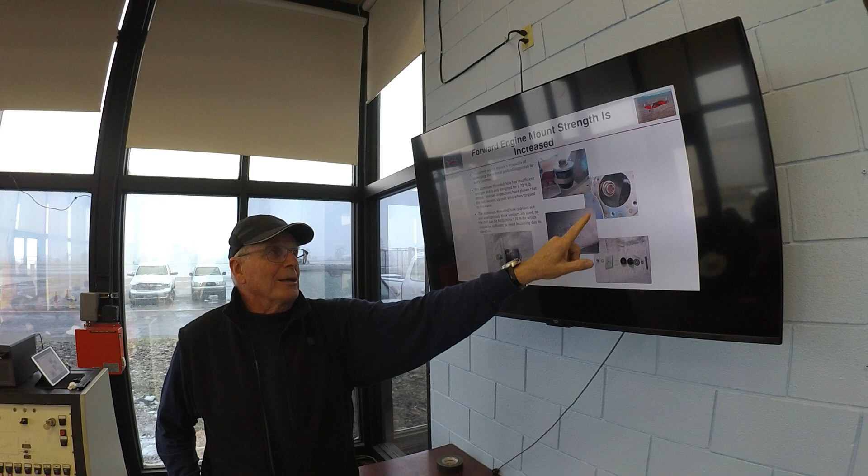So I modified it, put a different bolt in, put an inspection cover so I could get to the nut on the back side. And everybody's doing this now. So you can get the right preload on the engine. It reduces vibration and wear. A couple other things.

I put a manual flap system in. The original Venture, when you put the gear down, the flaps came down. It was just a safety thing, right? Put the gear down, flaps come down. Well, you don't want that here in Los Alamos if you've got a strong crosswind, right? So it's easy to modify it so that you can operate them independently. A lot of people use electric actuators for that, like electric flaps. That's really cool. It's a switch you flip.

The only problem is in a really fast airplane, when it cruises at 240 knots and the maximum flap speed is 170 knots, it's easy to put the flaps down when you're going too fast, right? An electric actuator is just going to crank them down and overstress them. A manual flap actuator, if you're going too fast and you start to pull that thing, you go, whoa, I better slow down, because you can feel the pressure right off the bat. Plus, as long as I'm working, it's working. I don't have to worry about fuses or anything else.

And then, this is trying to reduce cooling drag. These are fairings underneath the engine, so when the air comes in, it goes down through the fins, and then it has to exit. It comes in, turns once to go down through the fins, has to turn again to exit, right? And usually underneath the engine, you've got all these wires and cables and spark plugs and stuff. If you can make the flow exit without making a sharp turn, and avoid having things it's going to run into, you can reduce cooling drag. About 10% of the drag of the Venture is cooling drag. So there's a couple knots right there.